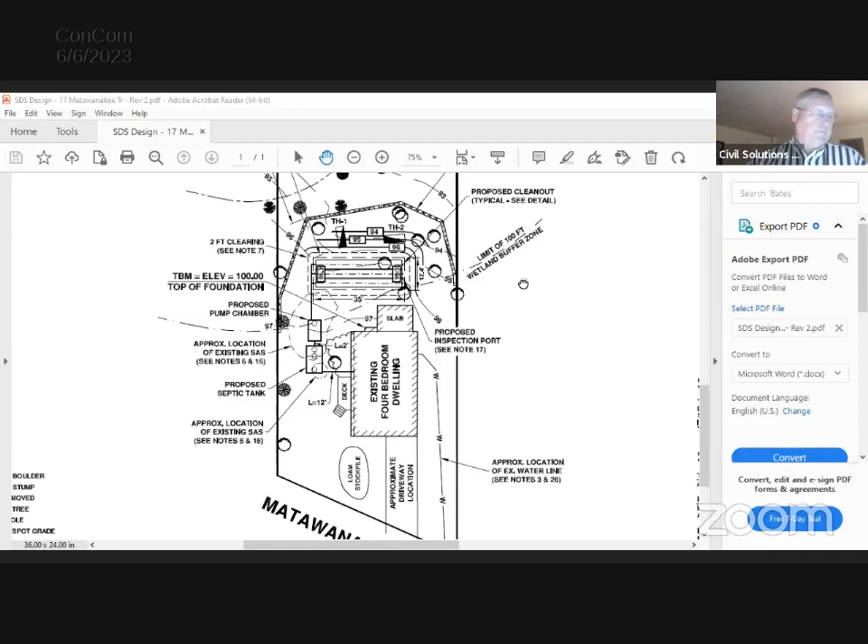The plan, I have made some changes as we discussed at the last hearing. There was some discussion, and I've made the changes. So initially the hay bale line didn't come out quite to the 100-foot buffer zone, so I have extended both ends out to the 100-foot. Did add a stockpile location here outside the 100-foot. Don't believe there's going to be that much fill material here. Most of the material that's out of the area of the proposed leaching area will be used for breakout material right around the base of the system. This should not be excess material.

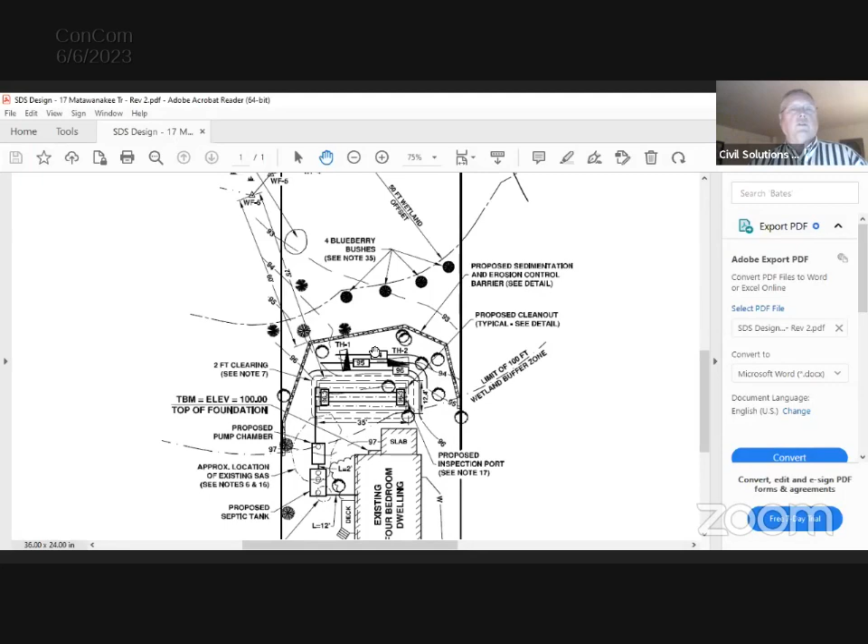But there will have the topsoil, which will have them stockpile out. We had discussed putting a berm along the 50-foot buffer here, basically to try to prevent people from using this area. I think a berm along this area would create more problems than it would solve. I think it would tend to block the water, create a pool in here, which would not help the septic system once you're backing it. So we did have 3 trees that needed to be removed. What I'm proposing is to put some blueberry bushes just inside, or just outside, the 50-foot buffer, basically to create a little hedge row if you want. I think that would be sufficient rather than putting the berm here.

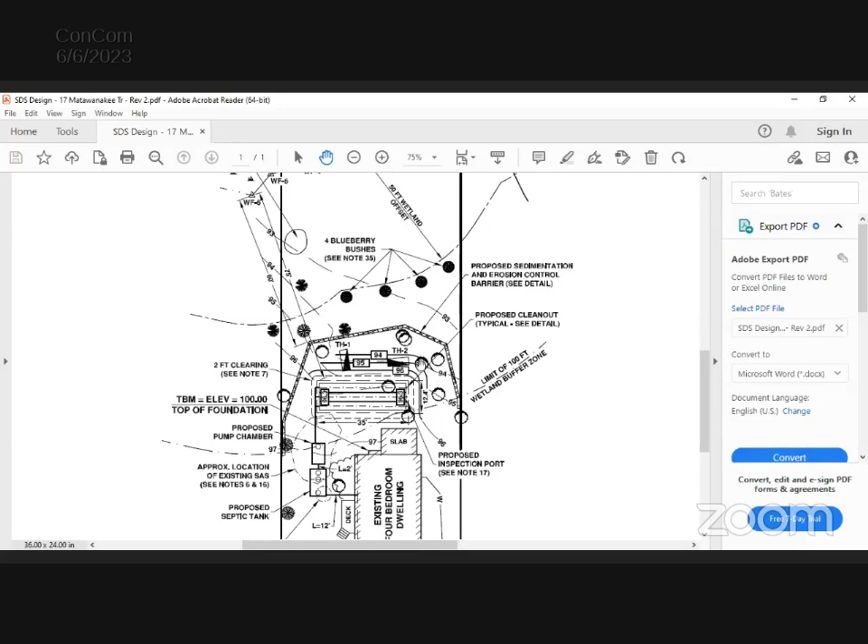So Kevin, you think that 3 trees equals 4 blueberry bushes? Well, I figured 4 is better than 3. What are the trees? I'm not recalling what the trees are that are coming down, Kevin. So there, I think there was a maple. I believe they were all maples. Red maple, yeah, or not even red maple, but Norway. And there were some additional trees back here. It's all kind of rough terrain, I guess, very natural state, which we're proposing just to leave alone, try to maintain it as much as it is.

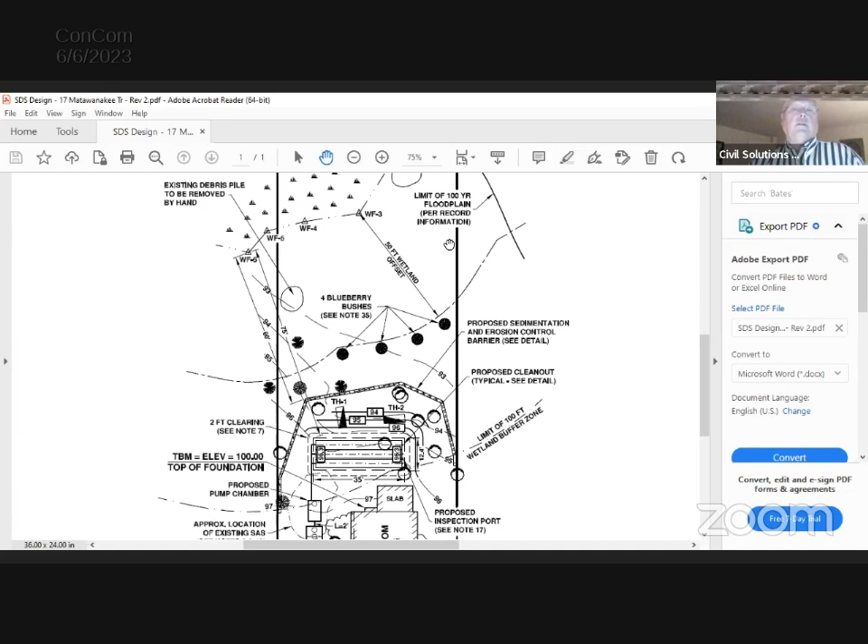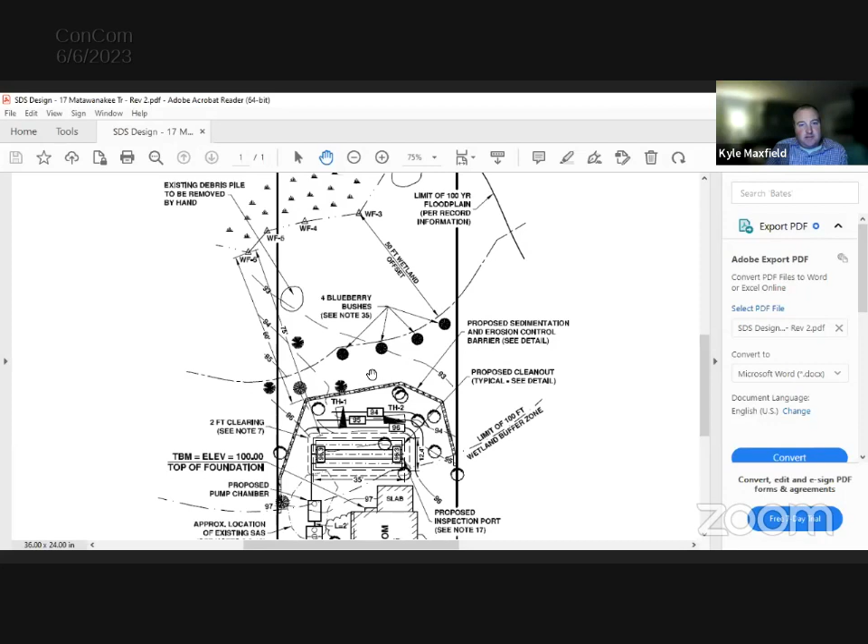Has DEP given you your number yet? I have not received that yet, no. I think I would like to see something a little more robust in terms of plantings if it's not too late, especially since we don't have our number yet. If the commission members are in agreement, I don't want to hold it up. I was going to use the same word, Sarah. I'd like to see more robust plantings, or more diverse. If one blueberry bush dies, they typically all kind of die if they don't like the climate there. So maybe figure if we put something useful that the homeowners would enjoy, they're more likely to maintain them and leave them. Put something else in there, and if they're not so keen on it, then I would say in addition, not supplanting, changing them out, I would try something else in addition. Use your imagination.

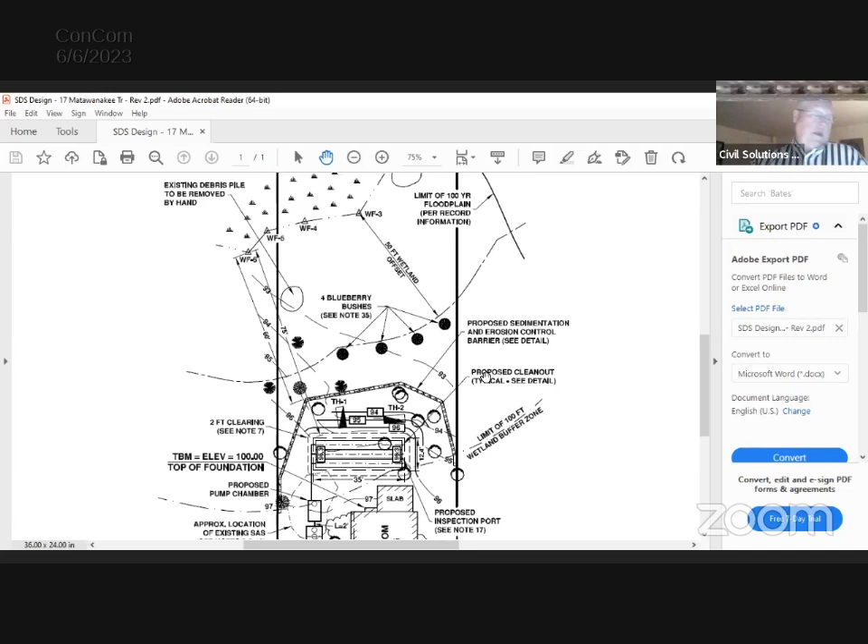Okay, commissioners, any questions? I don't have any questions. No. Okay.

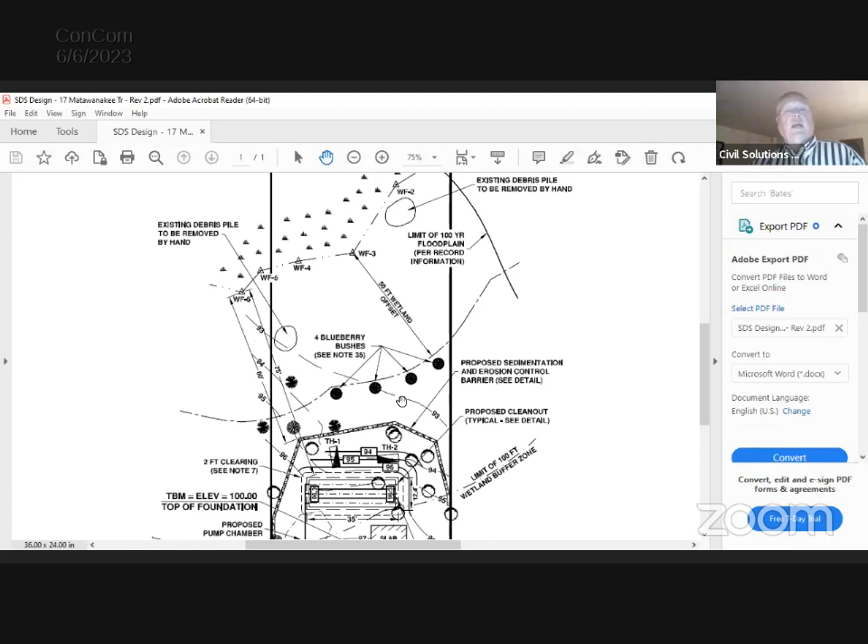Then there were a couple of debris piles, basically some brush that I thought the Commission might want removed. How do you propose to do that? By hand, just walk in there, pick stuff up and all that. Will that be done at the beginning or the end? I would think they'd want to start with that. It's nothing heavy enough, I think it can all be managed by hand.

Can I check with the commission? I would tend to recommend shorter shrubs to go in with the blueberries, because if you put in a shad bush or something, it's going to get tall and they're going to want to cut it down to keep their views. Does that sound, assuming it's robust enough, appropriate? Like the height of boxwoods? Yeah, I mean a blueberry even can get 8 to 10 feet, so just nothing that's going to turn into a tree that blocks their view or off to the side. I don't know if you had a strong feeling one way or the other. If there's anything that could be a pollinator, that would be helpful. Perhaps you and Kevin can work that out. I'll talk to Amy about that then, and between the two of us we'll come up with something.

We meet again on June 20th, where you don't have your DEP number. Are you okay with that? Should have that by then. They'll have had it in time. So are you requesting a continuance till June 20th? Yes, please.

Can you just double check there's no one out there in the audience with any comments? It's weird, because when he's screen sharing I can't see it. I had to shrink my screen so I can see it. There's no hands up, I don't see any hands up. I still can't see it. What can't you see, my screen? No, sorry, the attendees. Oh, I got it. Okay, I got it, Amy. It just makes it harder to see. Yep, no hands. Okay, sorry Kevin, we're just navigating the other way. Yeah, no, that's okay, believe me, I don't have a problem.

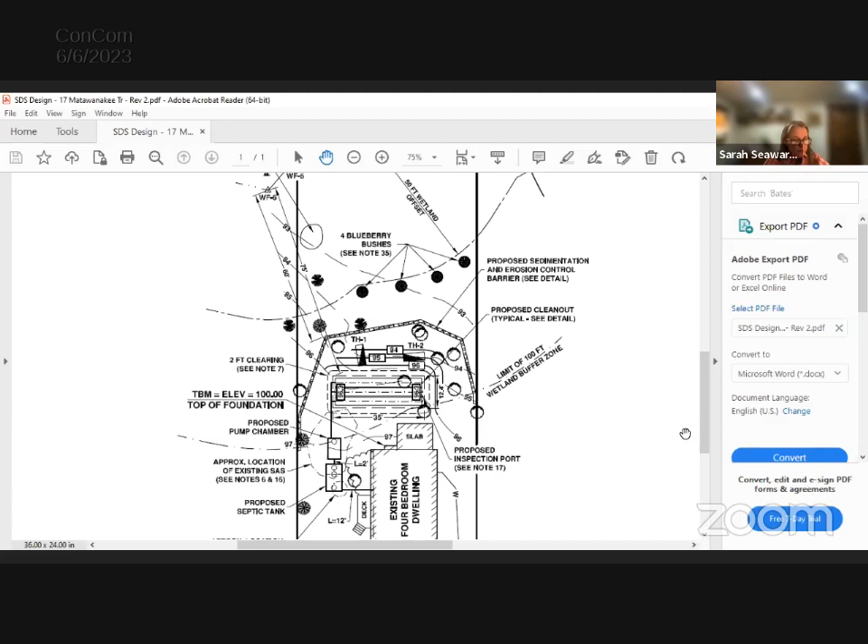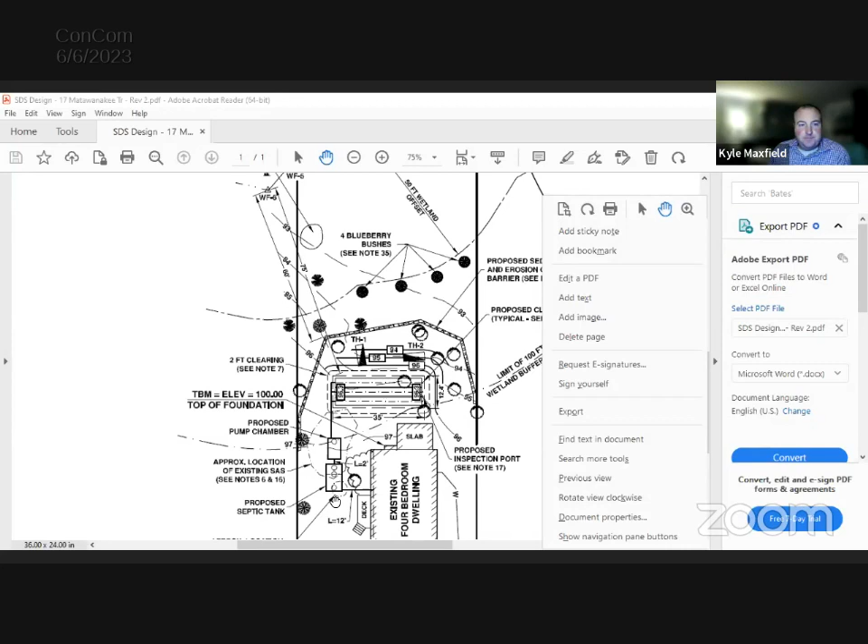Would the commission want any kind of signage in there, or boulders? I don't know if it's really necessarily appropriate, but if there's something, I'm sure Kevin would probably rather hear about it tonight. Have we been using signs lately? No, Durkee. Yeah, what are they? We did do it over at Durkee. I mean, I guess this is just one individual lot, there's a house right next door and another one right here. These lawns go way back. Yeah, and this lawn here basically goes back to the wetlands. Okay, I'm not sure I need to see signs here. I agree. Okay, I think you're all set, Kevin. Thank you, all right, thank you.

Okay, the time is now 8:38, and we're opening the 8:15 public hearing, request for determination of applicability, Foster Street reconstruction. Who is here to speak to that?

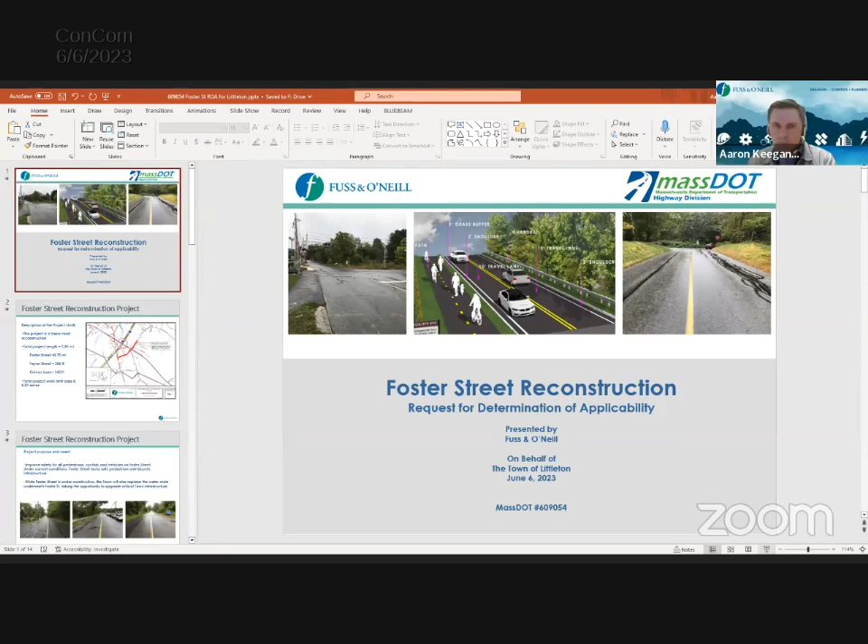Okay, so our request for determination of applicability is for the Foster Street reconstruction project. We are MassDOT project number 609054. It is a transportation improvement project. Construction is being funded by MassDOT. The applicant is the town of Littleton and Stephen Yonley from the Department of Public Works.

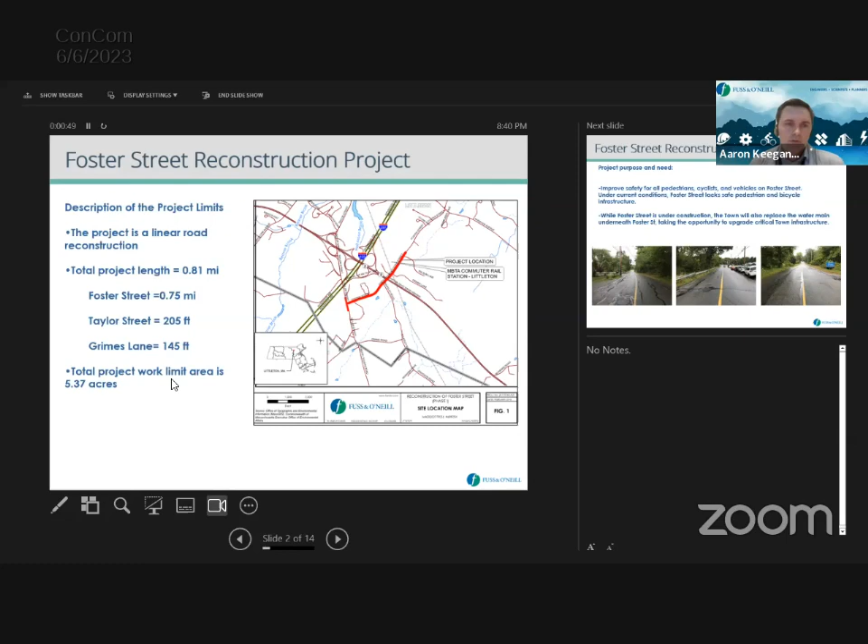The project limits extend from Taylor Street to Balsam Lane on Foster Street. Total project length is 0.81 miles, mostly on Foster Street, with some length on Taylor Street, about 200 feet, and about 150 feet on Grimes Lane. The total project work area limit is 5.37 acres.

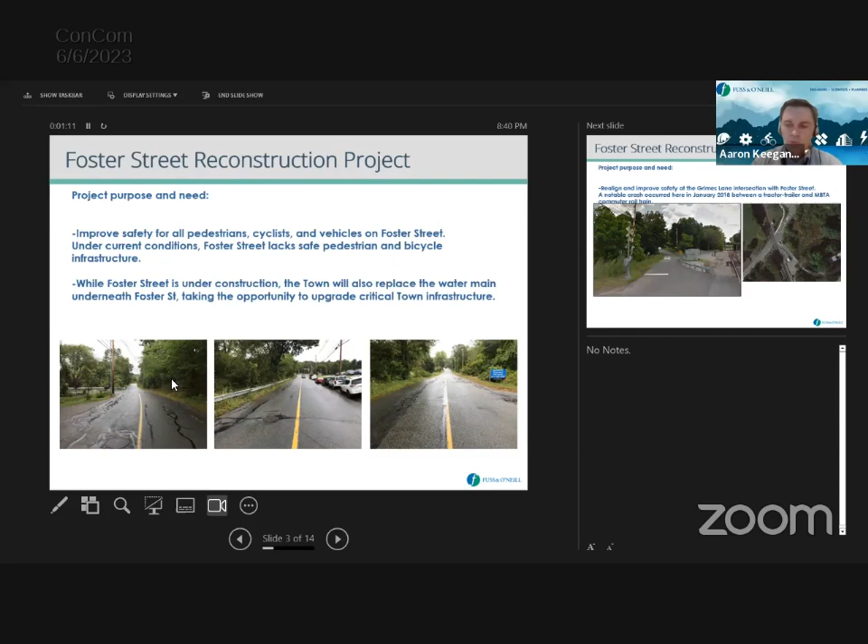The purpose and need of the project is to improve safety for all pedestrians and cyclists. Currently, there are no sidewalks or bike lanes on Foster Street. A major element of the project is underneath Foster Street. The town is taking the opportunity to replace the water main while the road is under reconstruction, under what we call a dig once strategy.

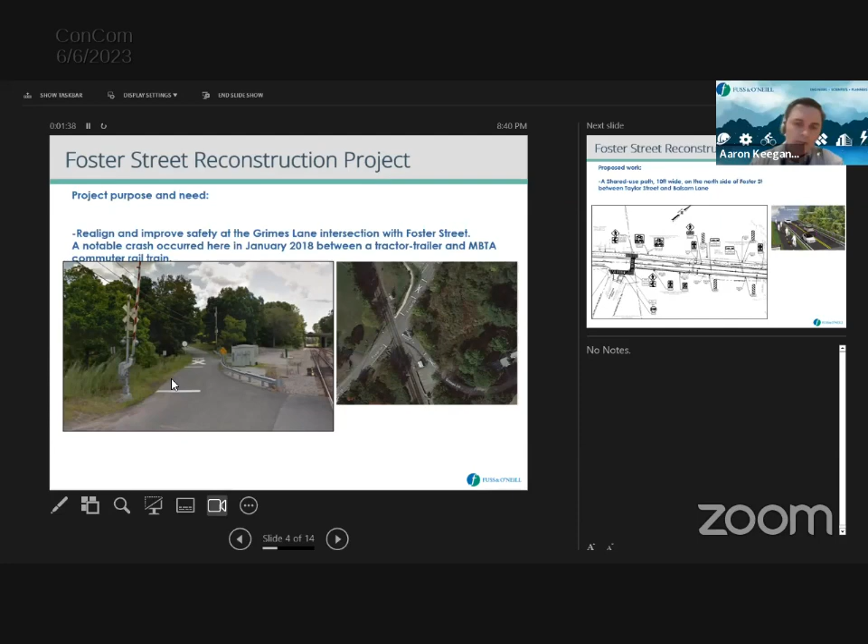Another major purpose of the project: Grimes Lane, where it intersects Foster Street, currently does not meet standards for the alignment of the road where it meets Foster Street near the MBTA rail crossing. Also, the road is substandard width for a two-way street. So the purpose and need is to correct some of those design deficiencies.

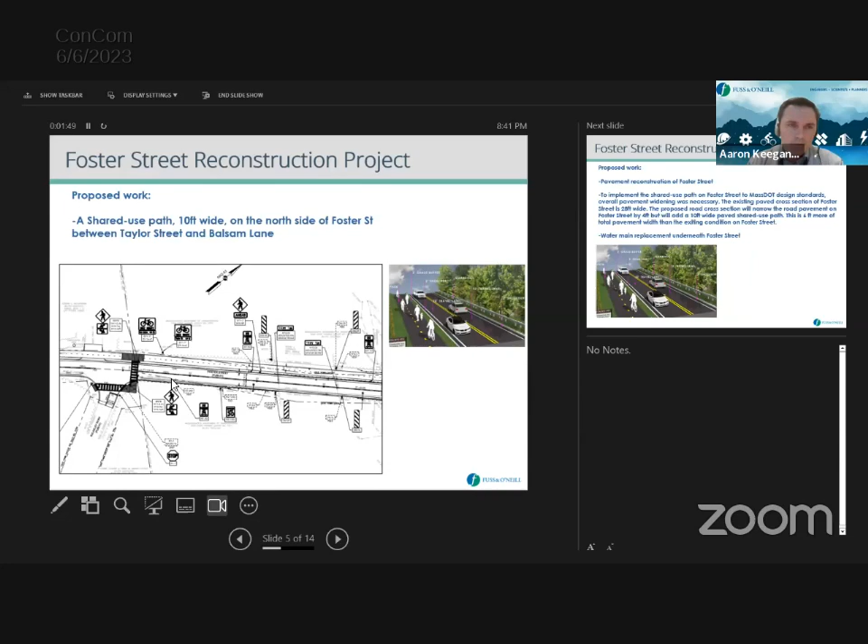Proposed work: the project proposes a 10-foot shared use path on the north side of Foster Street between Taylor and Balsam Lane. The cross-section of Foster Street, as it is today, is 28 feet wide. The project will narrow Foster Street itself by 4 feet, but then add a 10-foot wide shared use path parallel and adjacent to Foster Street. The net widening of Foster Street is 6 feet of pavement.

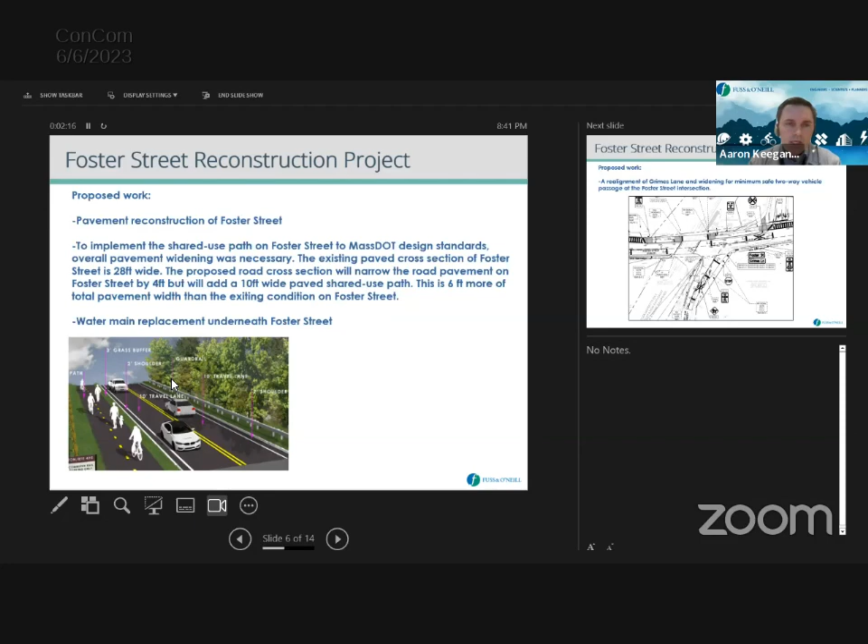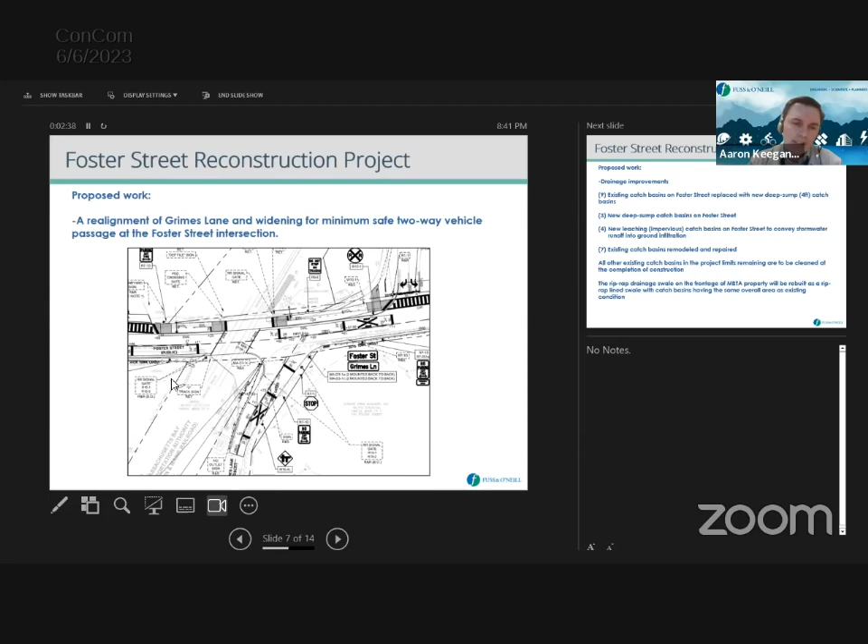Also, Grimes Lane will be shifted away from the railroad tracks, widened to the minimum allowable 2-way traffic width. Another reason for the realignment is to make sure that when a vehicle is stopped at Grimes Lane, it's outside of the envelope of the safety crossing gates for the railroad tracks.

Along with the project, we'll be improving drainage. We will be replacing existing catch basins with deep sump catch basins. We're proposing 3 completely new catch basins. There are 4 leaching impervious catch basins that we're proposing. There are 7 existing catch basins that will be remodeled and repaired. All other catch basins that remain as is will be cleaned as is customary practice during the project. The riprap swale at the frontage of the MBTA property will be shifted by about 10 feet behind the proposed shared use path and put back to its current dimensions.

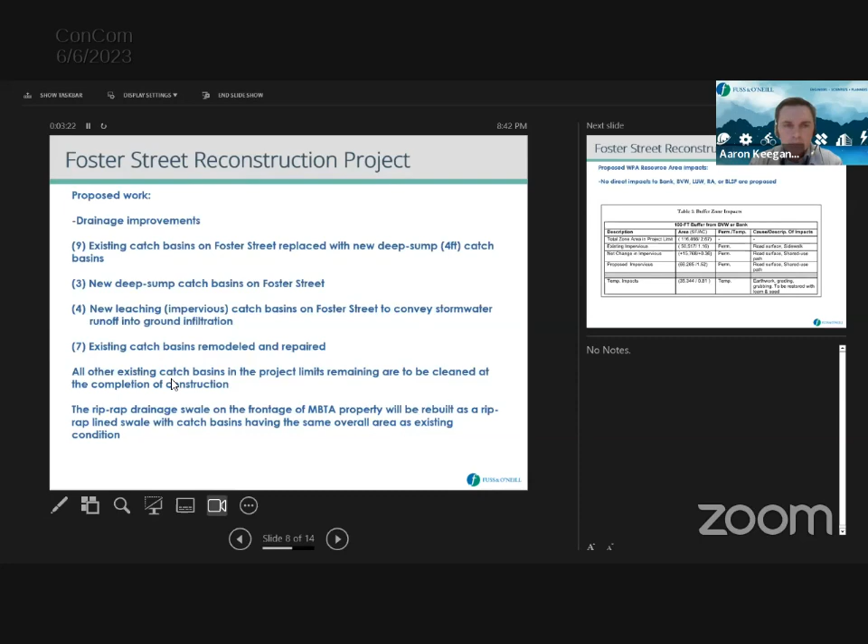Our proposed impacts: we are not proposing any direct impacts to WPA resource areas such as bank, BVW, land underwater, riverfront area, or BLSF. We are proposing buffer zone impacts. Our proposed net change in impervious area in the 100-foot buffer zone is about 0.36 acres, and our temporary impacts to the 100-foot buffer zone for work areas, mostly grading back to existing ground, is 0.81 acres.

As we mentioned in the RDA document, we just want to point out that the project is eligible as a limited project and also a redevelopment project for stormwater management.

Moving on to impacts under the Town of Littleton wetland protection regulations, the project does propose impacts inside the 50-foot no disturb zone. The net change in impervious area in the 50-foot no disturb zone within the project limit totals 0.17 acres, and proposed temporary impacts during construction for earthwork, grading, tree trimming, are to be replaced with loam and seed. The total area inside the 50-foot no disturb is 0.33 acres.

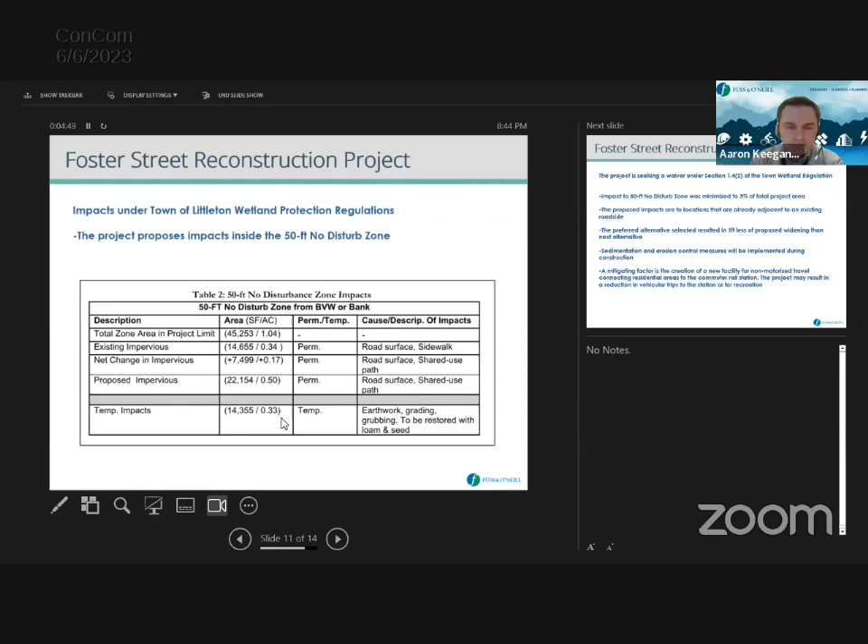The project is seeking a waiver under the town wetland regulation. The mitigating factors are that the project will propose a non-motorized facility that could reduce vehicle trips to the commuter rail station from the adjacent residential areas, and therefore may have a positive impact on emissions. The project, as a MassDOT project, will be under construction under the inspection authority of a MassDOT resident engineer who will be on site daily, and will include sedimentation and erosion control measures put in place and kept in place during construction.

We did also want to mention that the 10-foot path alternative was selected over the next alternative, which would have been to add 2 5-foot bike lanes to the road cross section. The preferred alternative with the shared use path is a foot less widening net, and also includes a grass buffer strip between the shared use path and Foster Street to help a little bit with infiltration. So that's a little bit about the alternatives analysis.

And just lastly, the impacted resource areas, the 100-foot buffer under WPA and the 50-foot no disturb zone, are areas that are already adjacent to Foster Street. Just wanted to mention that we're not proposing to impact a pristine resource area. It is, of course, a resource area, but one that's already adjacent to a roadway. And with that, thank you for listening, and we will accept questions and comments.

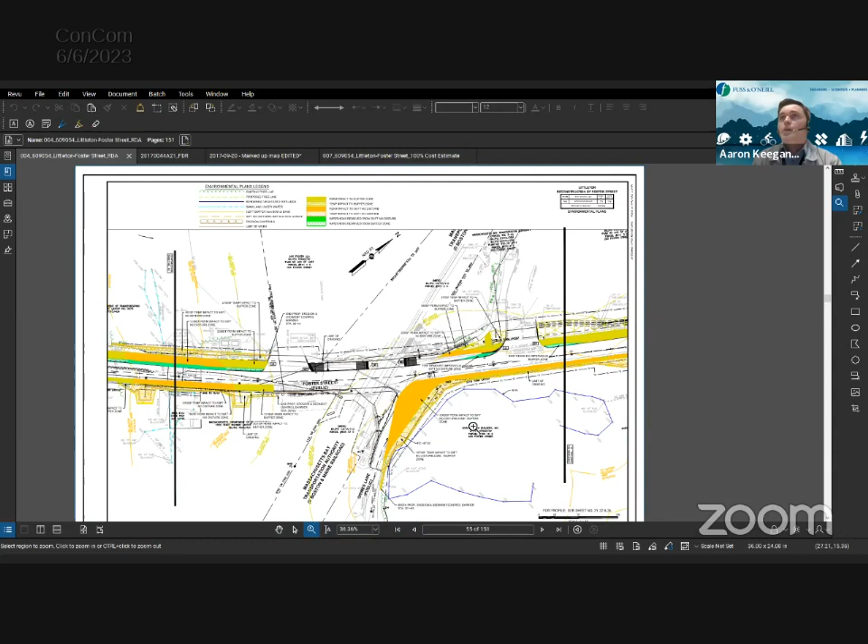Here's the area in front of Grimes Lane, where my cursor is. We can see that the shifting of Grimes Lane out of the railroad tracks does unfortunately cause an impact to the 50-foot no disturb area. The MBTA station is at the top of the page to my right, and on the next page, you can see it continues in front of the MBTA station.

So the dark orange solid shade is the proposed permanent impact to the 50-foot no disturb area, and you can see the Grimes Lane relocation is probably the largest contributing factor.

The upgradient source of that wetlands is Durkee? Yes, water flow. What season are we looking to do this construction?

I'll have to double check. Nick, do you recall - I think because we have had over the years some significant water that has come down through there out of the adjacent property known as Durkee, I would look more favorably on doing this during a drier season.

Yeah, so MassDOT, the means and methods in the overall construction schedule will be developed with the final bid documents and with the contractor. But this project is scheduled for advertisement, I believe February of 2024, so construction would likely not commence until the summer of '24.

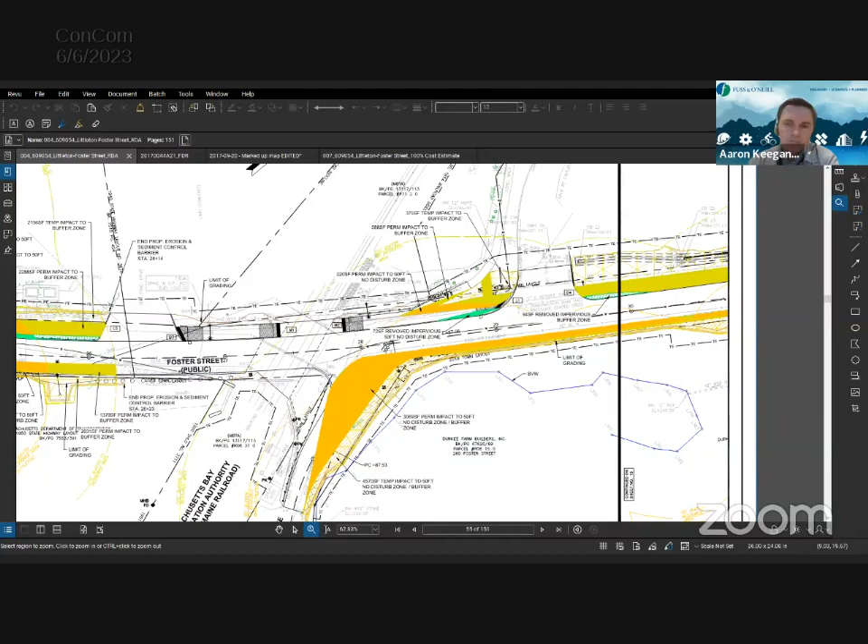Yeah, that was the question I had too, Chase. I mean, and I appreciate the 100-foot comment, but you went on to inform us that there's permanent impacts within the 50-foot no disturb area. I guess we could look back at that, but I'm not sure that we've given a negative determination when you're having permanent impacts inside of the 50.

Well, I mean, I guess the entire road is within the no disturb area, so it's like you can't even do any road work. It's kind of the linear road projects, that's kind of why - I don't know, Aaron, if you want to touch on the limited status. It's almost not even - how can the town do anything on a linear project?

The area impacted is significant, however. Was the water line replacement that they did a little while back an RDA? I guess I'm asking Amy. Can't speak to that. I'm not sure, I can't. I'm thinking it was notice of intent, but I'm not 100% sure, I do not remember. And that was pretty much 100% cut and cover on the road? No, they had some shoulder work, I think.

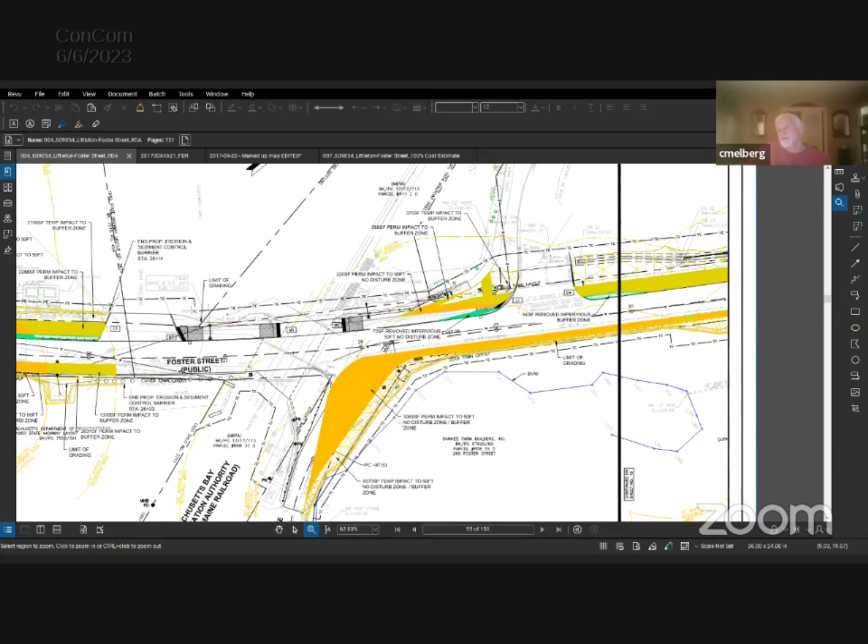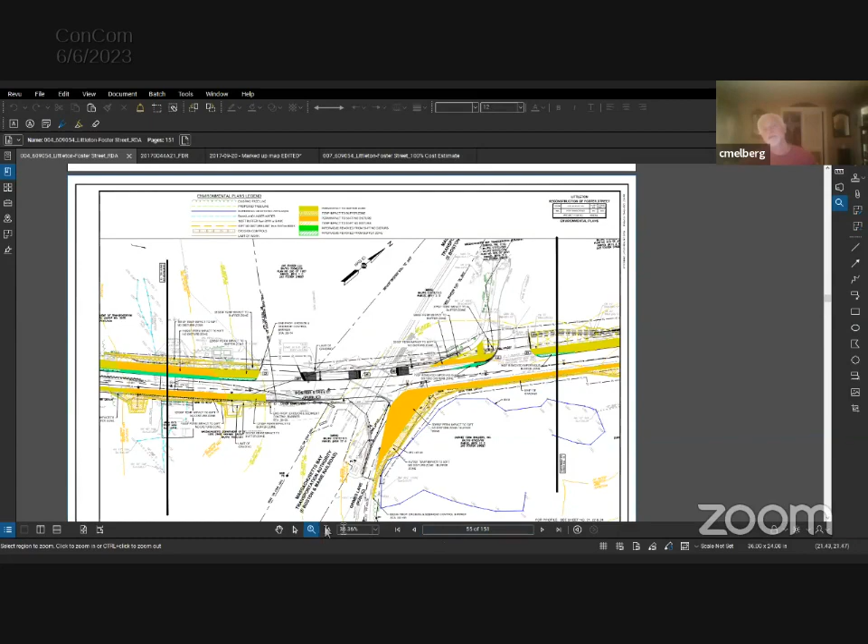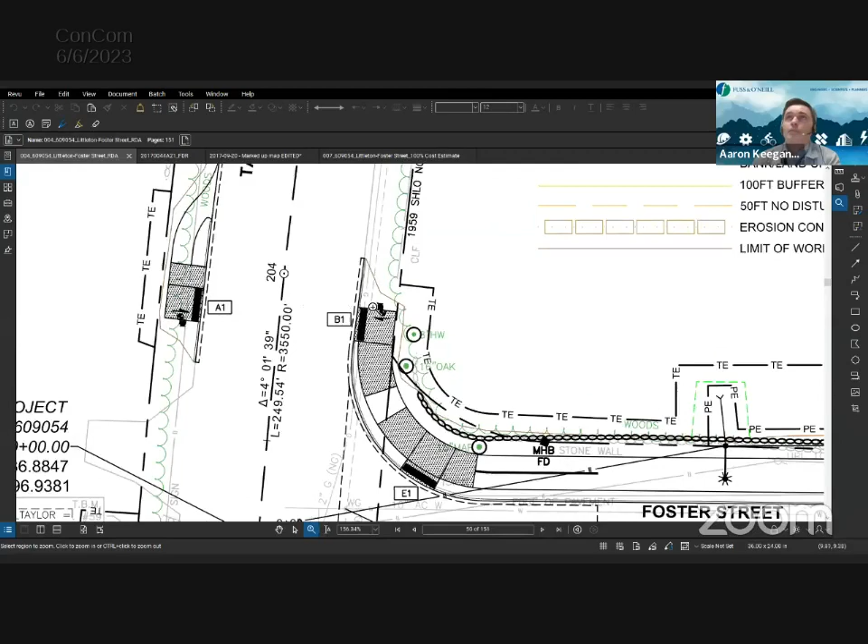Okay, anyone have any questions? Hey Sarah, Carl, so the project goes to Taylor Street, correct? So Taylor and Foster, yes. Does it happen to meet any type of sidewalk up there, or bike lane, or are we just making this new multi-use lane that's going to dead end? There's a sidewalk on both sides as you go out to Taylor, on the left and right, isn't there? Yes, we're proposing two pedestrian ramps with an on-ramp for a bike shoulder on Taylor Street, and there'll be a flashing pedestrian beacon for this crossing on Taylor Street.

Oh, that might be. Currently on Taylor Street there's nothing, no sidewalks, absolutely nothing. Now, I will say it's not subject to this project, but the town, I'm sure you're aware, is looking to install a sidewalk from the new Amazon facility down Taylor Street to connect up with this project. So there is a larger picture at stake here. So this is kind of an enabling project. Yeah, I get it, that was just my point - we're kind of just building this and it's going to stop. No, I think the plan is to connect up to all the businesses on Taylor Street and continue the sidewalk for connectivity purposes.

Yeah, no, it's a good question. I think the town's looking - this is phase 1, Foster Street. We're working on phase 2 and 3, which takes it all the way up to Tahattawan and Harwood. There's bigger plans. The bigger concern isn't going to the Amazon building, honestly it's going the other way down - getting the rest of the neighborhoods into it. The same point goes the other way - it's just going to dead end to nothing at this point, right? There's no sidewalk down Foster Street, so you're going to stop at some point.

Hopefully in the second phase. Yeah, we tried to get it to Balsam - that was a big generator in the neighborhood. When we were working a couple years ago with the former director, we found this is the first phase - we wanted a quick win to build momentum, because the next phases are not easy. The road gets really tight, there's big trees, really steep slopes. The roads are really tough. So stay tuned, but yeah, this is phase 1 of 3 basically.

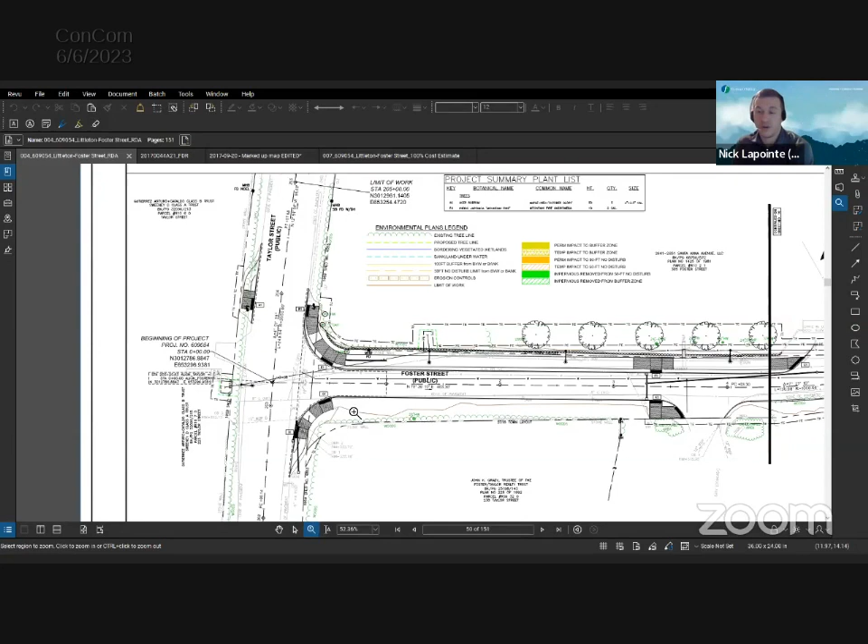We could probably still have a site walk without necessarily having... I think, Amy, what we could do is put it on as a discussion for the 20th and see if on the 20th we have to do any other site walks, and maybe kind of combine them together if we can. Yep, okay, all right. Thank you, we appreciate your presentation, and we'll wait for the notice of intent. Okay, thank you. Thank you.

It is now 9:06, and we're going to open the 8:30, which is a continued public hearing, notice of intent, 166 Mill Road, which is Mass DEP 204-0981. I'm letting them in now.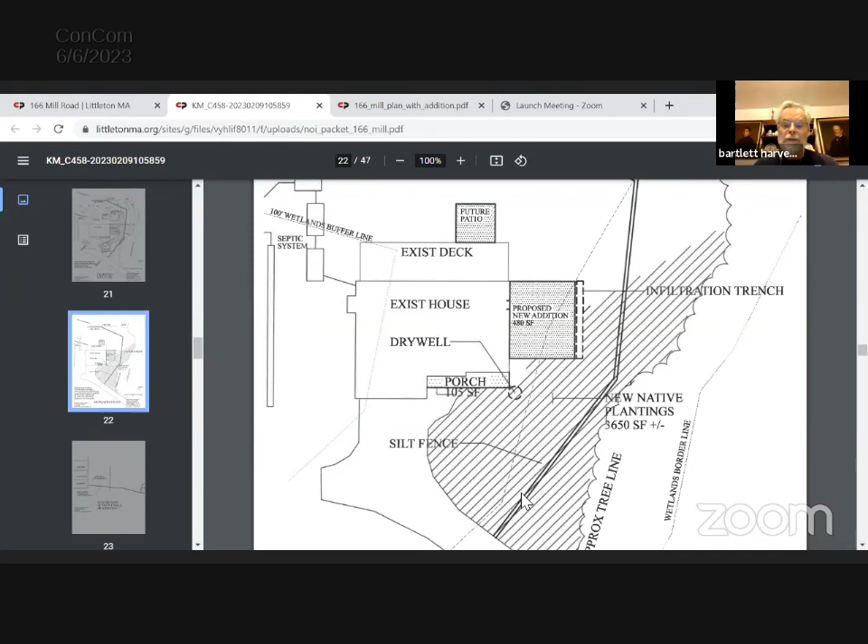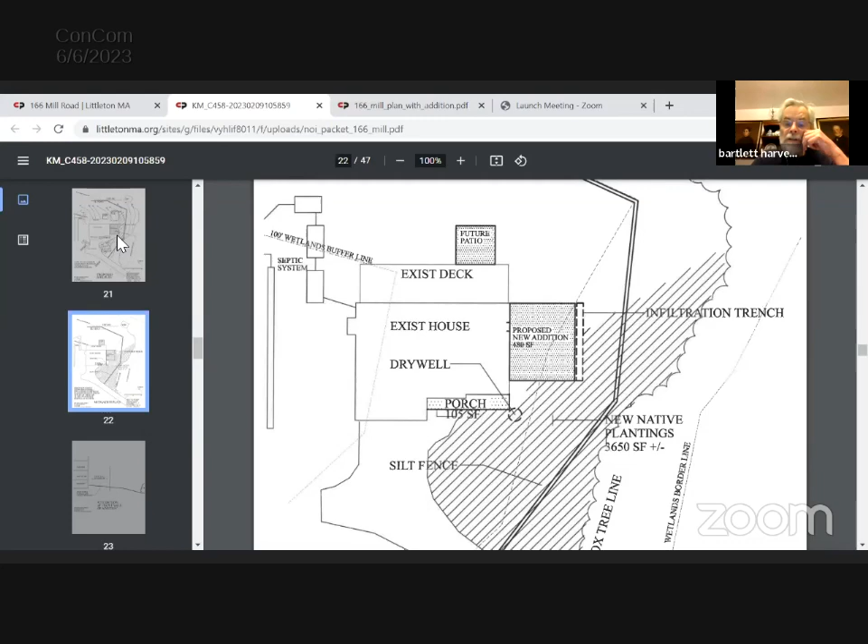There's a storage area between the driveway and the silt fence for stockpiling materials, shown on one of the drawings. But I think you get the idea of where this location is. This side of the house gets the sunlight the client wants. The back of the house doesn't get any sun at all, really, so moving the house back there doesn't make any sense. And the whole site around the house is fill.

We also propose an extensive program of eradicating invasive species on the site. There's a lot - we saw garlic mustard earlier. I know there's a lot of Japanese knotweed and bittersweet vine that we've been trying to get rid of, and we want to continue doing that. So we really have the same proposal we had in February.

We just want to bring it back to the commission and get a reading on whether we can do this. Mr. Harvey, thank you for your detailed presentation with this map, this is helpful. Can you tell the commission, your proposed vehicle access, how close within the 50 is your silt fence and your access area?

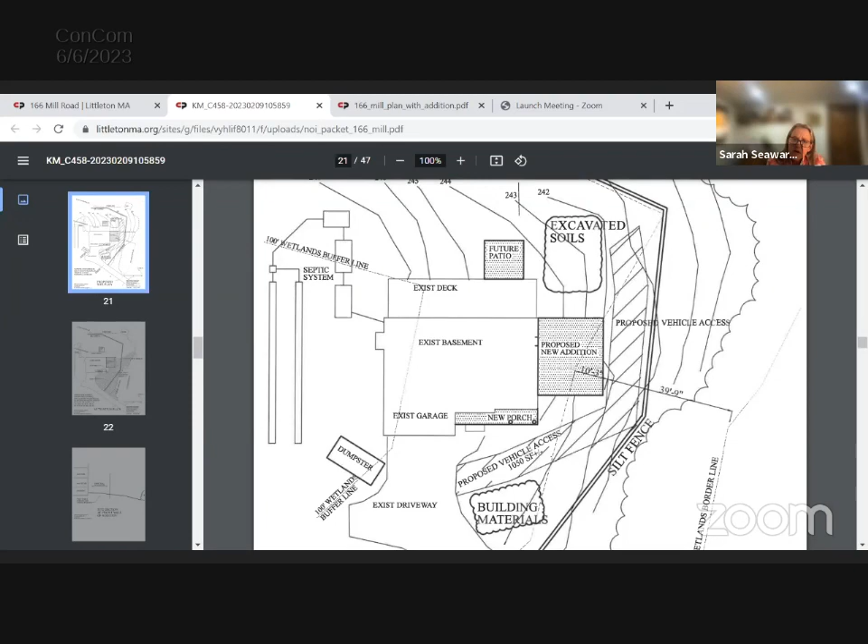Well, let's see, I don't know. The silt fence is the double line that's pretty close to the tree line. The 50-foot line goes through the addition, it's that thin dotted line. So the vehicle access to the back would also be in the 50-foot line. So it might be easier to work backwards - if we were standing on the wetlands flag line, how close is the work to that line? Well, I've got 39 feet there, which is the nearest corner of the addition to the wetlands, to the flagged line.

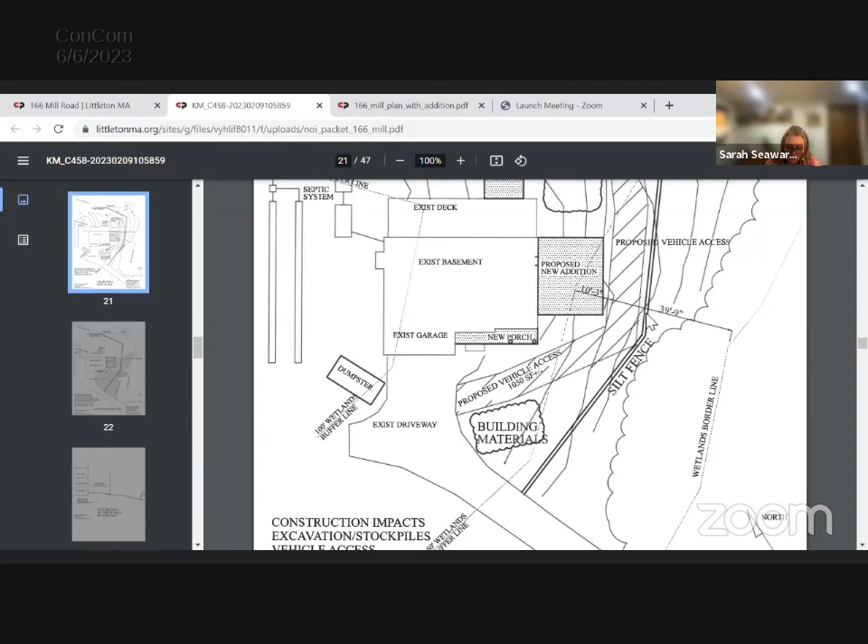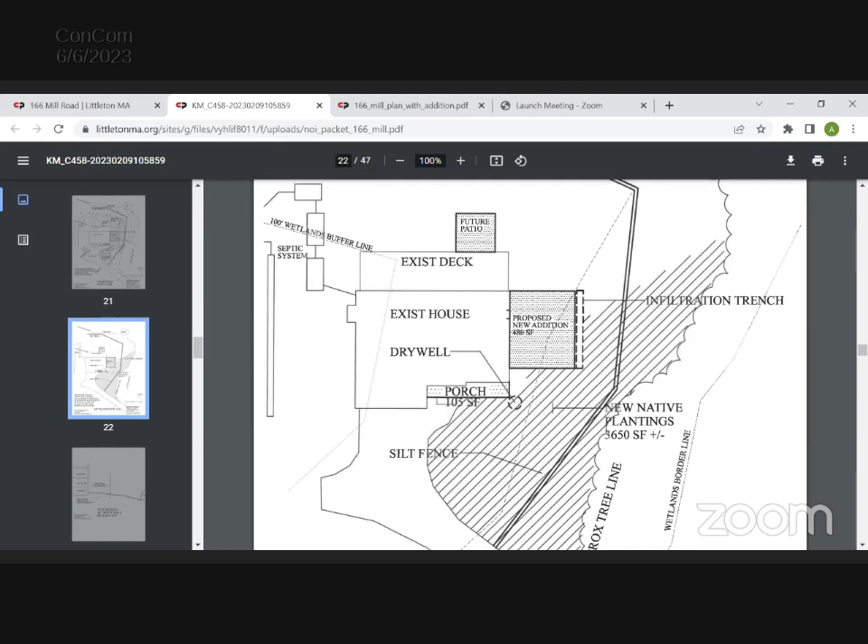Okay, thank you. Commissioners, questions? I know some have been out on site. Yeah, Amy, can you go back maybe down a plan there? My question is about the new native plantings. Now I'm seeing a fully hatched area here - am I to understand this is going back to a naturalized meadow or something like that, or are you talking about putting individual shrubs and trees in this area?

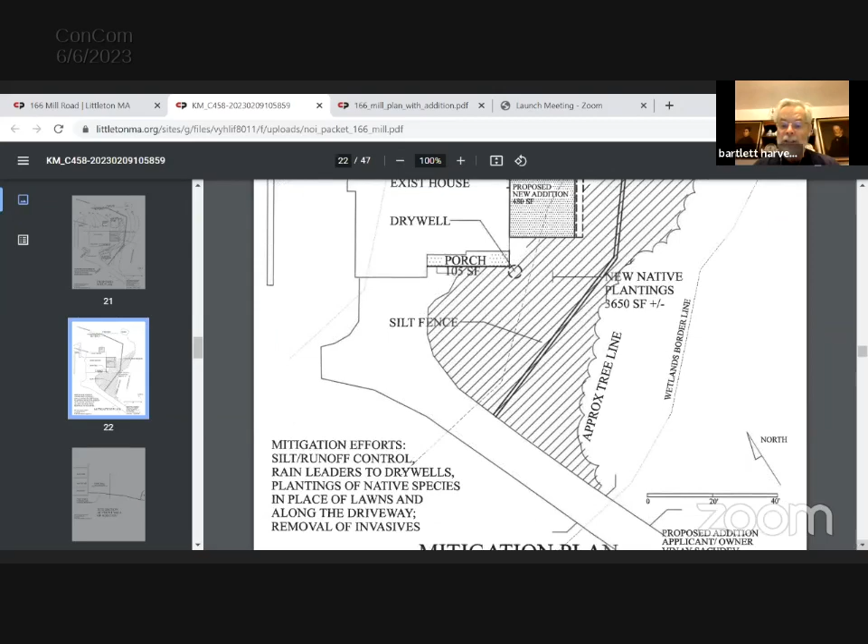Well, we haven't identified it, but all along I've been thinking shrubs and trees. There's lawn there now that's not very successful. We'd have to find plants that work in the available sunlight. But my goal, and I believe my client's goal, is to reduce the amount of lawn and lawn mowing, so that we'd have plantings between the house and the tree line, and also there's an area of grass along the driveway going up to the road that has plantings in it now, which we'd expand, native plantings along both sides of the driveway going up to the road, which would be part of the removal of invasives.

So is that part of your narrative for your waiver? Yes. Okay.

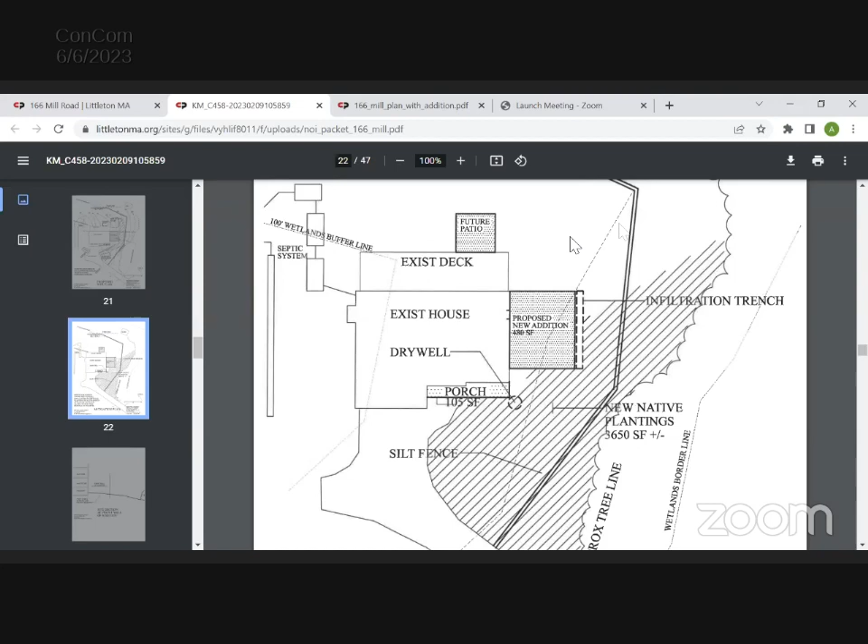How does this reconcile with the May 19th plans on the project website that show a wetland replication area? I'm rather confused here. Well, the wetland replication area was what was left over, undocumented from the 2007 order of conditions when the lot was proposed and the bridge was built across the stream.

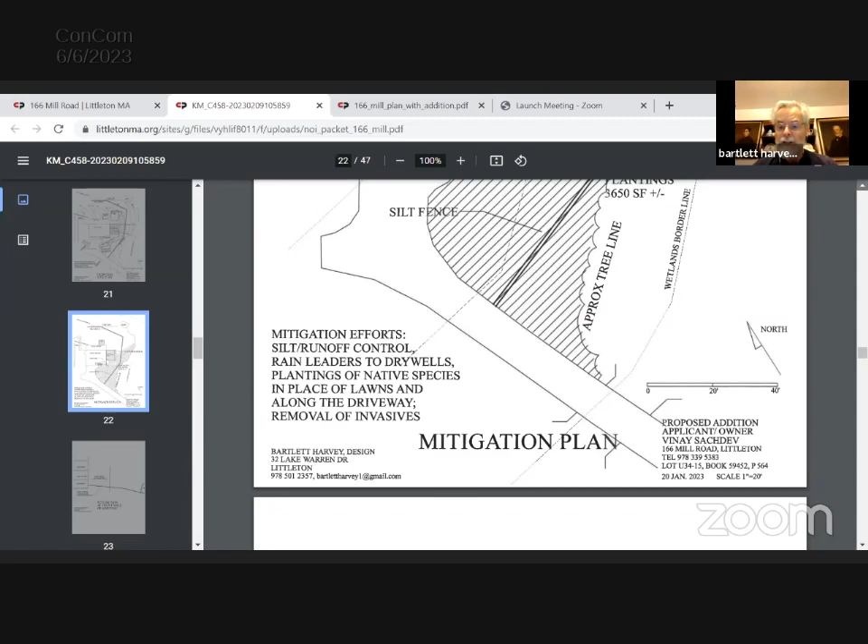That wetland replication was done and completed. I don't know exactly when, but it was visited by Maureen Harold and later by Matt Waterman. Maureen identified wetland species and wetland soils in the area indicated on the map.

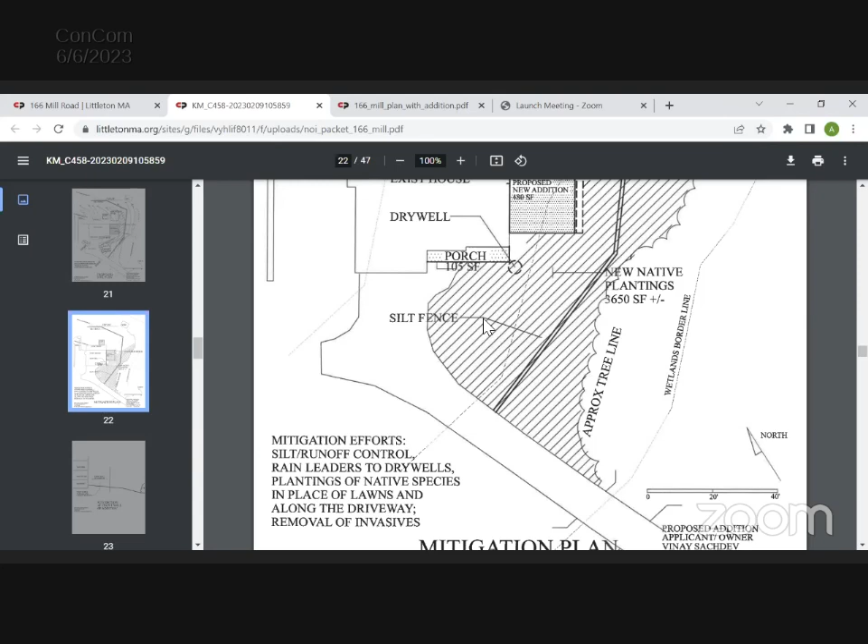So that's to do with the closure of the old order of conditions. Yes, okay, I got it. I'm sorry, I misunderstood, I thought it was a change associated with this project. No, very good. Thank you.

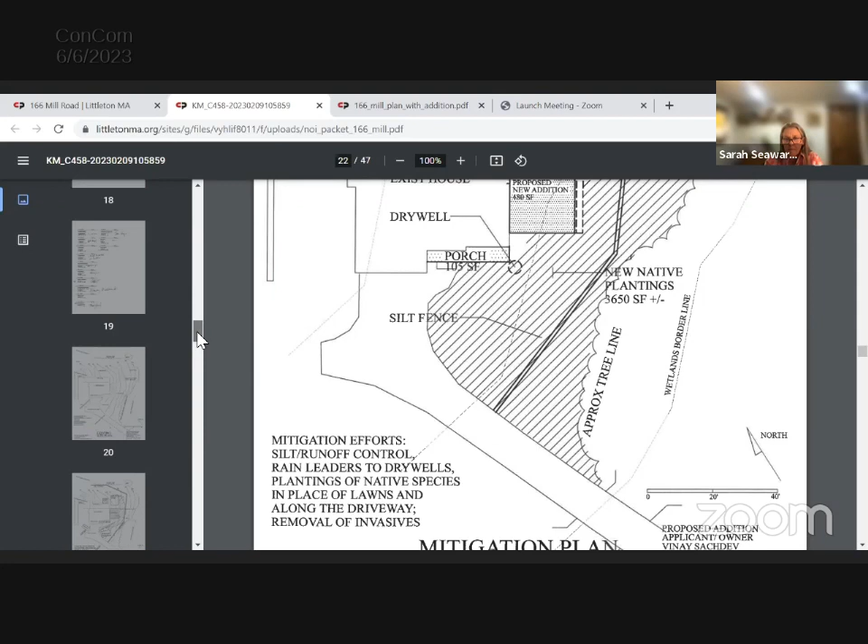Is the proposed addition going to be on piers, or is it a full basement? No, it's a full basement the way it's designed right now.

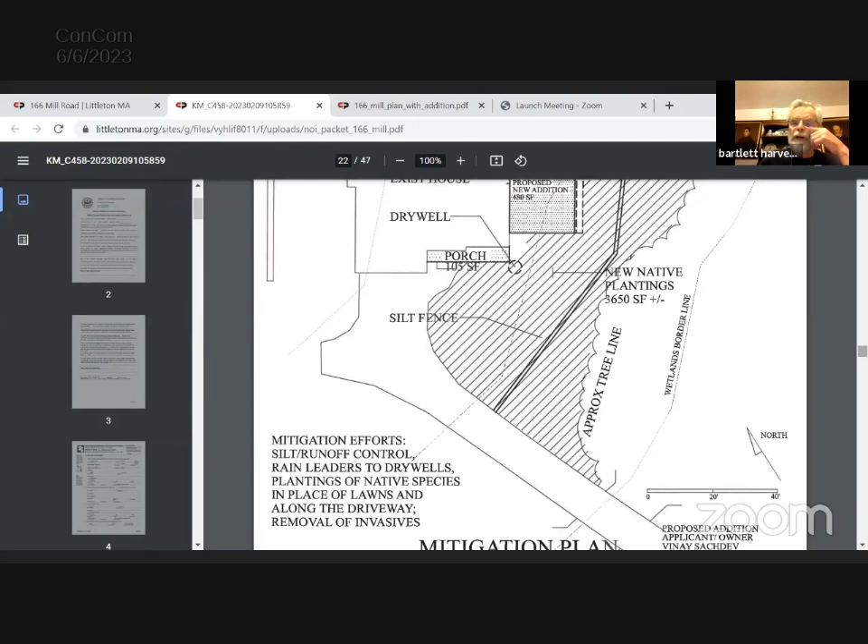And the white space next to it is a gravel trench for disposal of rainwater, with leaders coming off the roof. I think that's why we had some concerns on the first go round, that it was on that slab.

Questions? Guidance for the applicant? I just question if it meets the waiver requirements. I continue to fail to see how it does. Yeah, that's the main question we had on this same plan a few months ago, right? Quite some time ago, yep.

What's the pleasure, there's a notice of intent in front of us. We've done a site walk, quite a few people have been out.

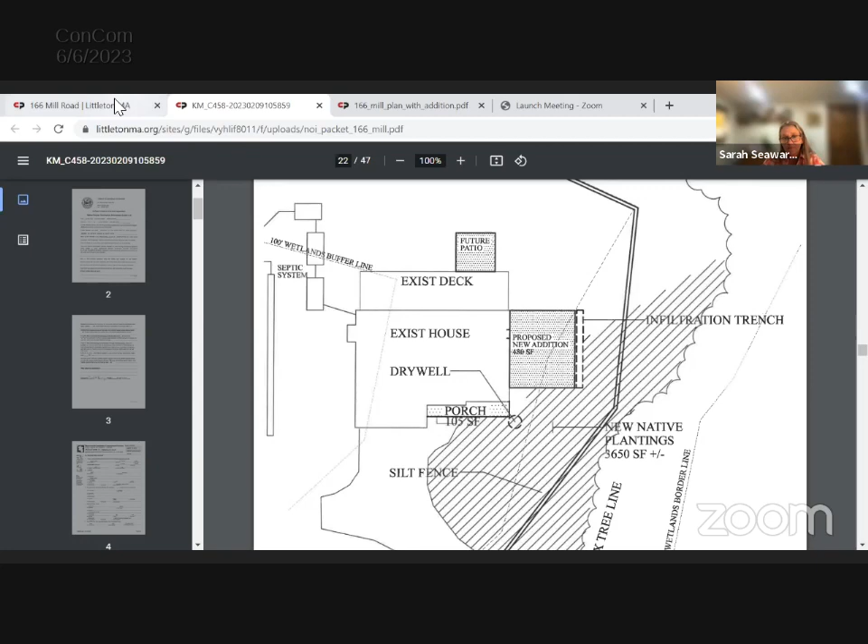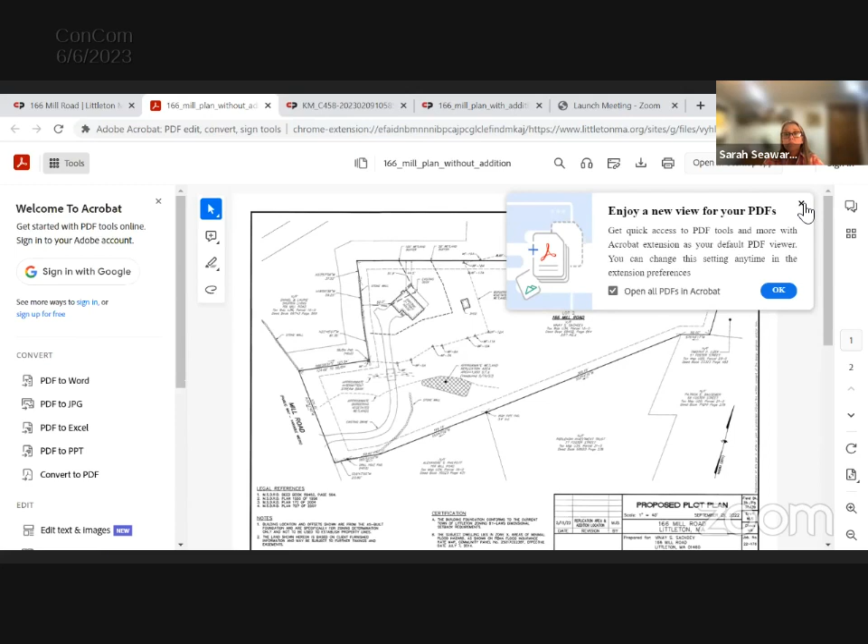Commissioners? I have sufficient information to vote. Okay. Likewise.

So with that, Bartlett, I think you're hearing that it's similar to the same feedback we've had before with the waiver, especially when asked for alternative analysis. There is land available that does not impact that area. Well, there's land in back of the house that doesn't get sunlight and doesn't meet the client's requirements. It's outside of the 50-foot, but it's within the 100-foot. Right, and it's most of the house. We recognize that. Commissioners, what would you like to do?

We still have a couple more hearings to go. Well, it doesn't appear as though the applicant is going to change. He's sticking with the plans currently proposed. So if there's no other changes, we could put it to a vote.

Okay, we would need a motion to vote. Then I move to close the public hearing and issue— well, let me just take one. I'll move to close the public hearing associated with 166 Mill Road, Mass DEP file number 2040981. Do we have a second? Okay, motion to close the hearing has been made and seconded.

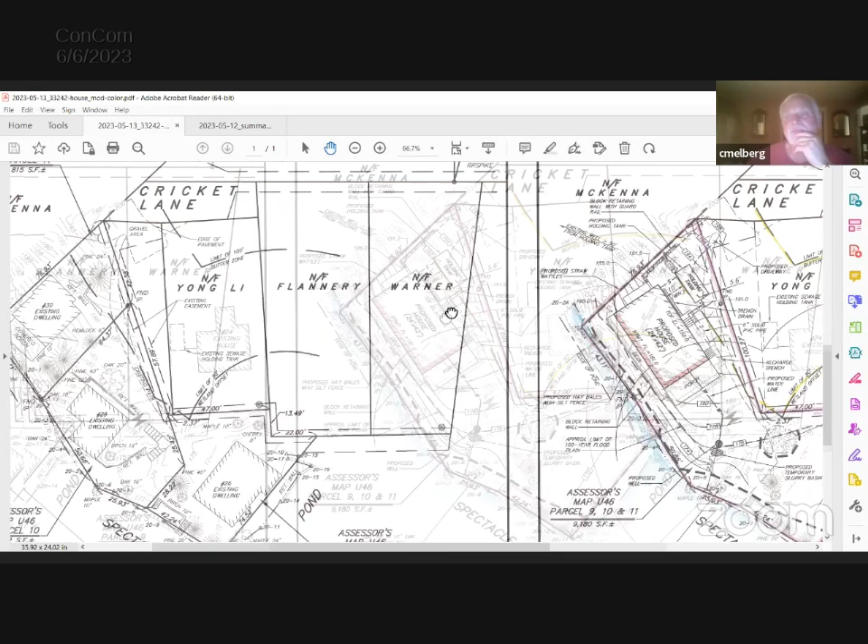So guys, let's get something straight. This was an existing... This is replacing an existing house. There was actually footprint there. There were actually 3 houses here.

Part of the initial approval to go in was, as opposed to upgrading and improving all 3 structures, what the applicant wanted to do was basically eliminate the 3 and build 1 in this area.

So that's why. Where were the septic systems for 26, 28, and 30? In terms of Board of Health records, there really wasn't anything on them. I believe one had like a leaching pit, but there was no real septic system that would come anywhere close to passing Title V.

Were they considered seasonal or year-round homes? I don't know if there was an official designation on them, I'd probably have to check with the assessor, but just looking at the construction, I'd say they were probably more seasonal type buildings.

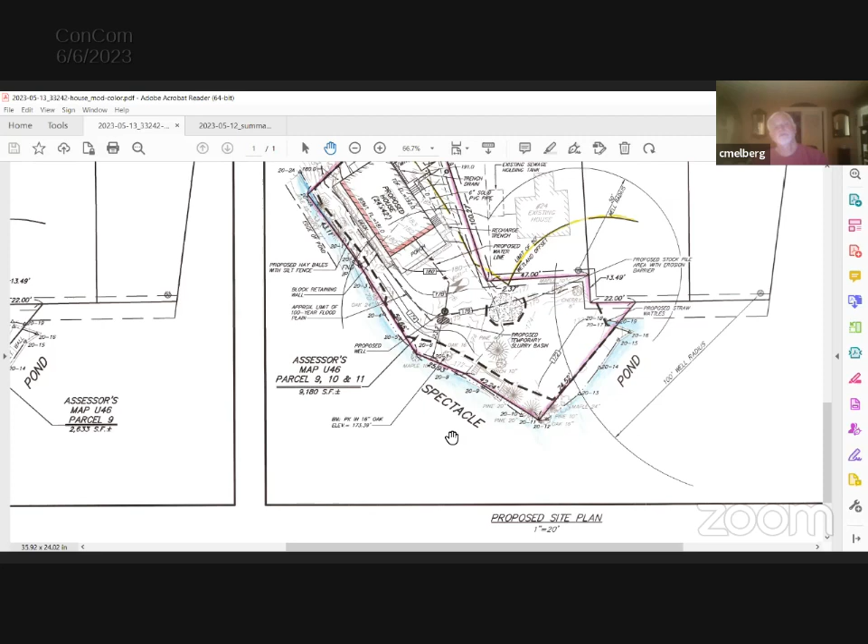So that's why, when you look at the two and what we went through before, what we've done is eliminated all the structures in this area here. So the proposed house is a new footprint. Correct, where a house wasn't before.

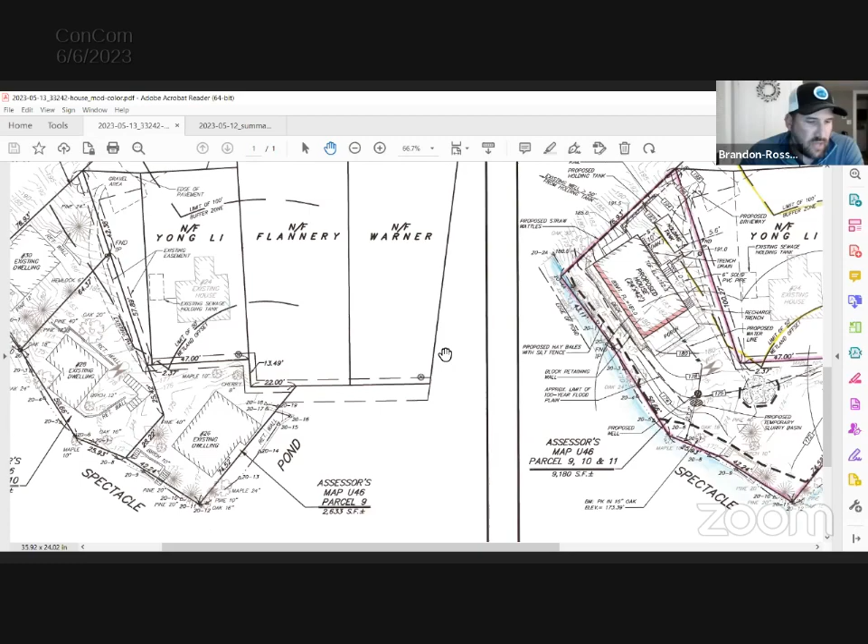And the closest point to the lake is what? Pre-existing it was a little less than 2 feet. The proposed foundation is just under 14 feet, and as you look at the aerial deck, that would be 9.4 feet horizontally.

I get the whole thing. It puts us in a very difficult position. I don't feel comfortable with this. I don't know.

Can we talk about the location of that proposed slurry basin, the temporary basin? Why was it put so close to the lake?

Given where the proposed well needed to be, that slurry basin needs to be just down gradient. During the drilling process, it's there to capture any product that comes out of the well. Given that this site is so tight with limited access, one thing discussed at the original notice of intent hearing is we can't get a drill rig down there, so it's actually going to be a point well. So besides testing the well, it's not going to have as much of that slurry as you'd get with a drilled well, but we still needed to provide something, just in case.

Commissioners, I can see that Carl has some angst about this. What are some of the other thoughts of other commissioners? I'm aligned with Carl here. In terms of the size of the building, the location, let's try and give some guidance on the change. I'm opposed to the change. Okay, thank you. Other commissioners?

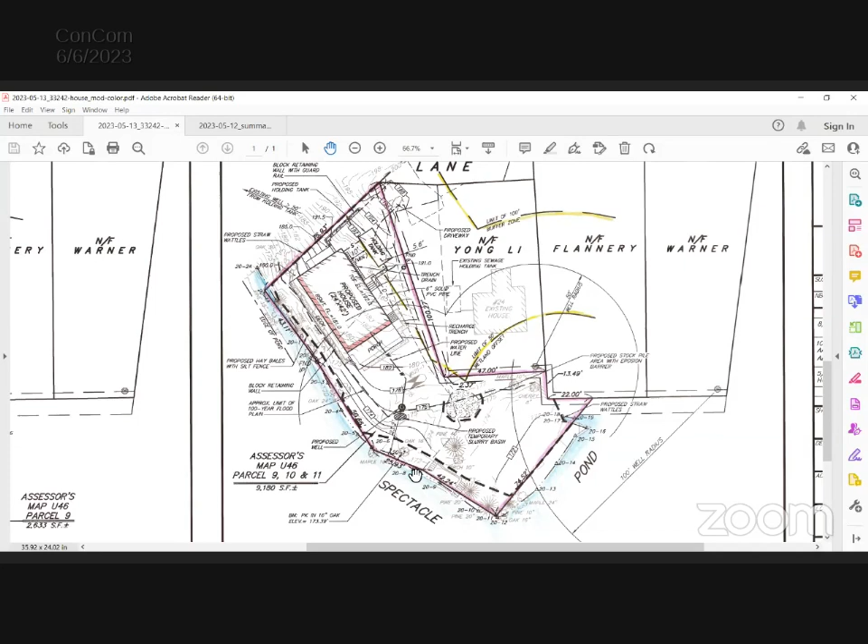Sarah, I would tend to agree with that. I mean, it's right on the water essentially, and expanding the square footage, I just don't see it as a viable way forward. Okay, thank you, Andrew. Anyone else like to voice their last opinion so we can move on?

Okay, all right, so we'll leave it at that. I think you've had some good dialogue tonight. Hopefully we've sent you in the direction that is best for you. Yes, thank you, appreciate the feedback. Okay, thank you, best of luck. Yep, have a good night.

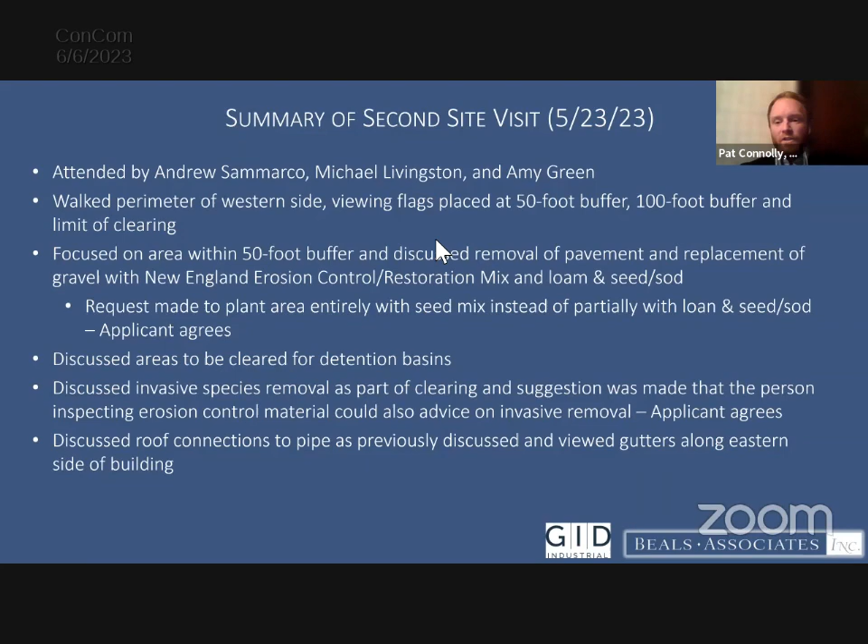And then lastly, we briefly talked about the roof connections and how the northern side of the building connects, we think, to the pipe which we talked about in the previous hearing. And also we pointed out that on the railroad side of the building, the eastern side, water is just collected in residential-style downspouts and gutters and infiltrated directly into the ground along that building. So it's a short site walk.

And then again, from our first presentation, the performance standards in the local bylaw for work within the buffer zone: we consider all the existing conditions and we minimize changes and disturbances to the extent that we can. We're remaining essentially within the limits of the existing disturbed and impervious areas, which is mostly gravel and considered impervious by Mass DEP.

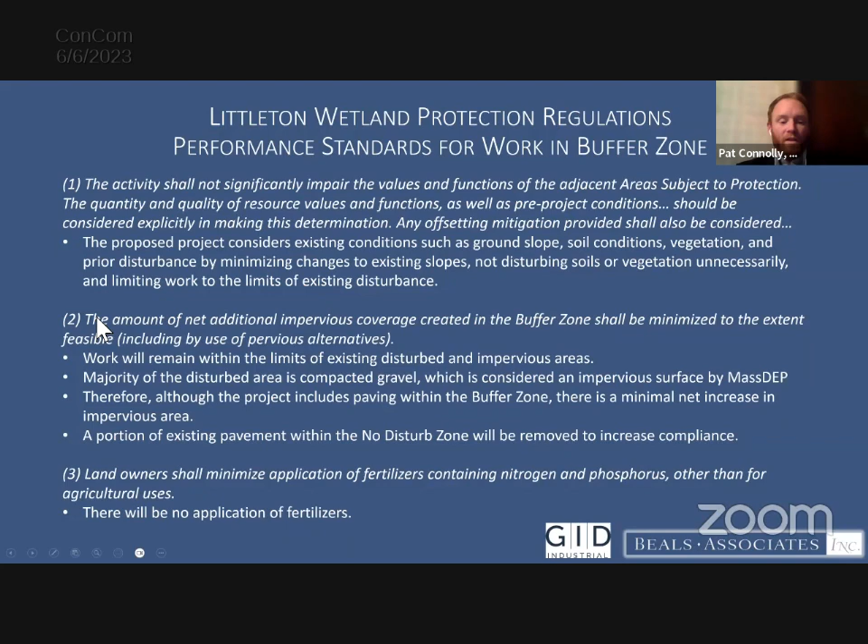We've heard on a couple of projects to that point, and so therefore, even with the proposed changes, overall there's a minimal net increase in the impervious area. And then there's the work inside the no-disturb zone that I talked about. The last point: there's no applications of fertilizers proposed as part of this project.

So just to recap where we are: we submitted this NOI in February, we've had 4 public hearings, we've had 2 site walks. We did revise the design a couple different times in response to comments and questions from commissioners, comments and questions from Green International, who's the peer reviewer, and then also based on on-the-ground conditions, mainly when we dug the test pits and found higher than expected groundwater.

The current design still protects the 8 interests of the Wetlands Protection Act and conforms with the local wetland protection regulation performance standards. Overall, the project does improve existing conditions in its original design and now in its current design. So I'll wrap up there and I'm happy to answer any questions the commission may have.

Thank you for doing that, Pat. That was helpful. I'm just going back to our original notes from the last hearing, where Green International had suggested test pits be performed, so that no roof leaders are discharging into the existing basins. Are those the test pits you were referring to? Yes. Okay, awesome, thank you.

I did have a chance to go out after you all went out, and I just had a couple comments on where your pink flags were, which is your edge of work. I noticed that beyond that, in places we have a lot of debris, and I'd like to make sure we're removing some of that debris, making it a little bit more habitat friendly. And if there are areas that have to be filled, that we're not putting in more of those stones and rocks.

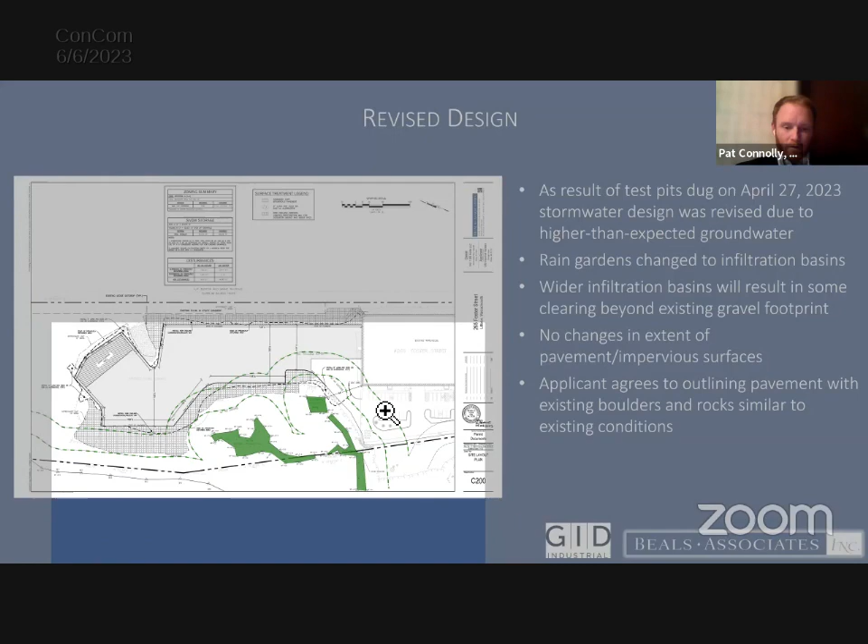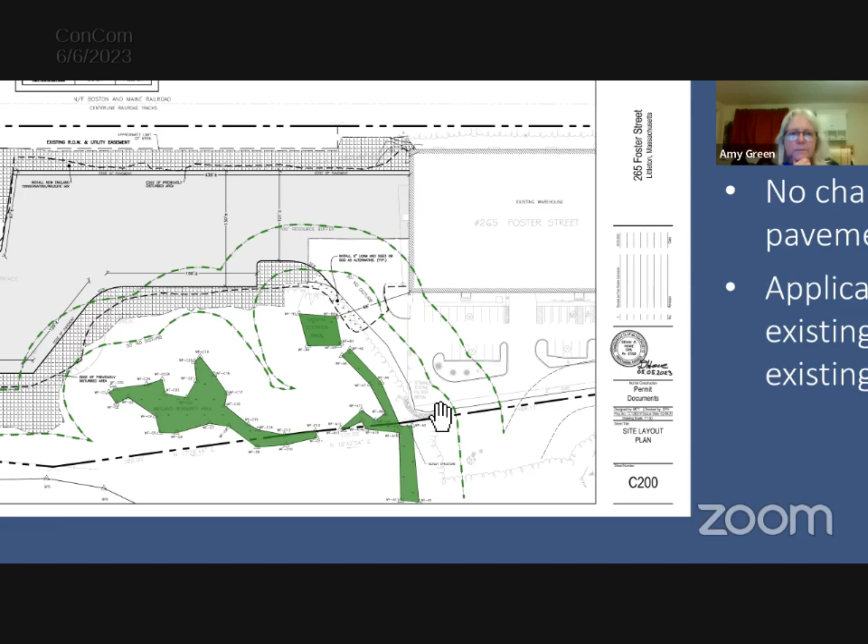That's a good question, Pat, could you address that? So I believe, Amy, did you happen to share with Pat that picture from the other day? Yes. Okay, so I believe you're talking about this area here where there's the stone check dam? Okay, so let me go to...

Amy, you're not able to share that photo, are you? I don't think so. Yeah, okay, never mind. So I guess the short answer is we're not proposing any work there. I don't think we're aware of that issue. So we can look into it. You got the photo that I saw though, right? Yes. Okay, and that was not even with a big storm.

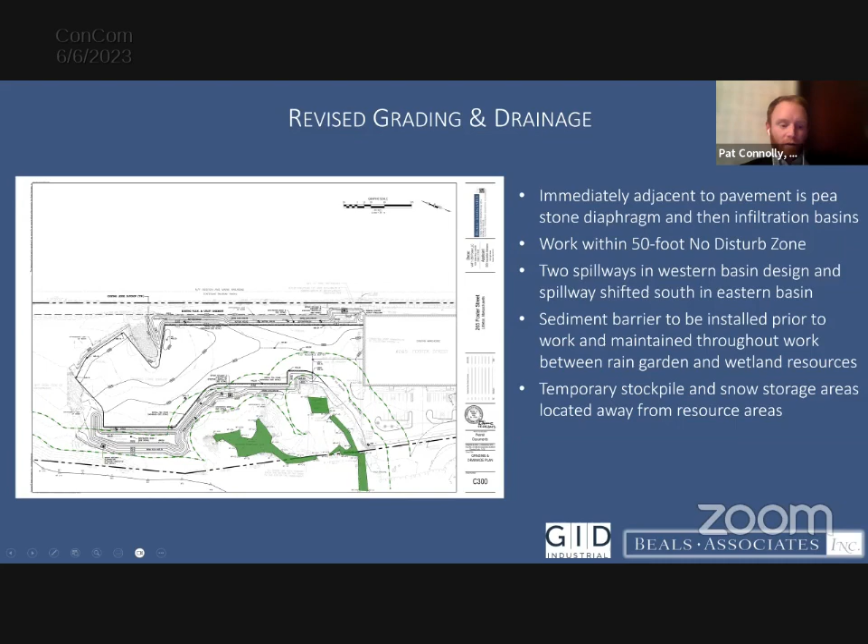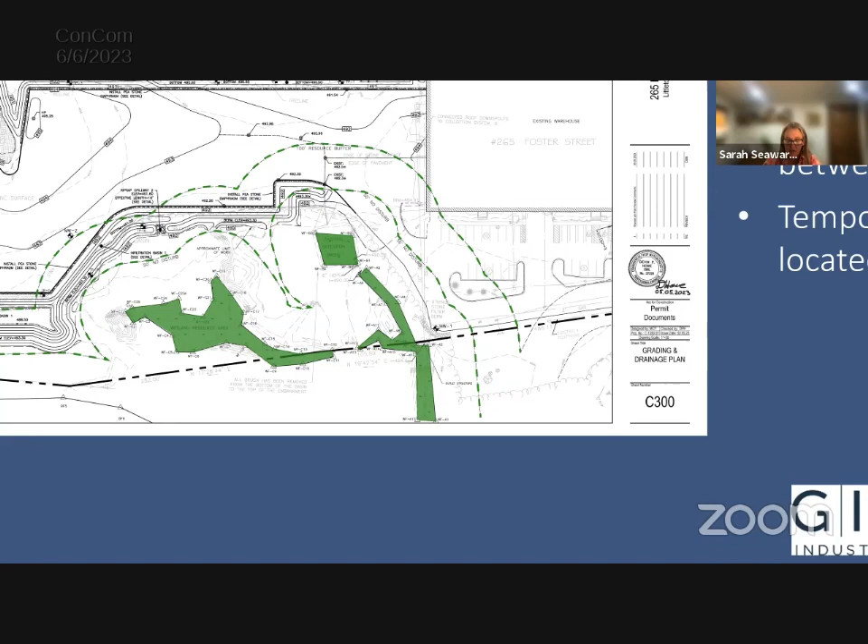So I guess the photo I saw was of the pipe, the outfall. And I sent you a separate one—let's see if I can get to it here. No, just prior to the photo that was taken on what would have been an inlet, but there is no inlet. How am I going to do this? It was a picture looking into that U-shaped area. Yeah, looking in, you'll see the crowned area, which is the barrier, and all the water that's backed up there. Because originally, prior to putting all those rocks in, the water was just sheeting right over. I don't know, let me see if I have this photo—bear with me.

Here, I'll show you what I have. So I have, yeah, the one prior to that. I have that one, I have this one, and I have the tires. So yeah, it was a separate—it would have been an email prior to that. I just have this other one, but it came through as a text message to my phone. So hang on a second, I think I can get it. Okay, if I can grab the screen. Is that showing? Oh, okay. Yeah, I haven't seen this before.

So Andrew, that's the area that used to just sheet flow right down. Yes, because the outfall pipe is actually below this, so this was undermining the pipe. So Pat, this was undermining the pipe that you actually have that other photo of. Yep, and so we put this in just as a stopgap. But this water's coming, as you're looking at the loading dock, right from the loading dock and coming right down through. So I thought that type of drainage and stormwater was going to be addressed, and I was surprised to see that much water there after not a large rain.

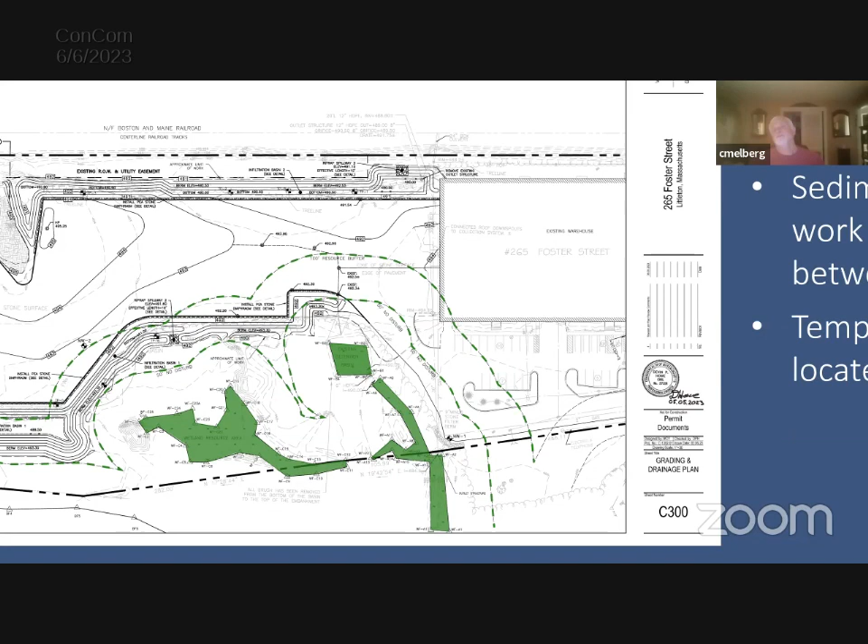Hey, one other question. Maybe it was addressed. We had asked the applicant to tell us where that water was coming from next to the railroad tracks that was going onto the site in high volume. I didn't hear a response to that. Did I miss it? Pat, did you address that in the last meeting? Yes, we had a couple slides that we presented. Where's it coming from, where's it going? So water is coming out of the outfall. I'll just go to the old slides.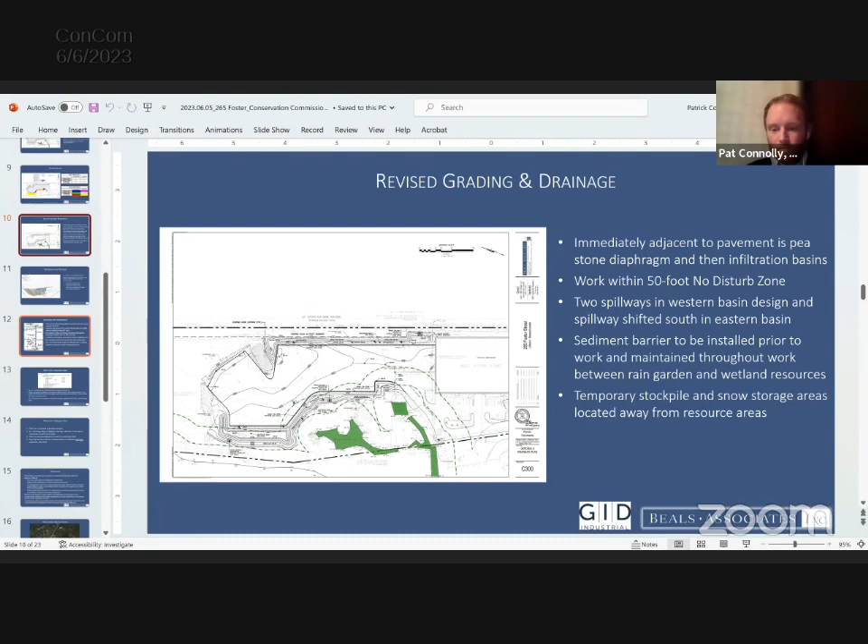So we tried to do a couple flow tests at 2 different times. Water wasn't flowing enough for the dye to make its way down the pipe. Water was coming out of the culvert into the catch basin, goes down the pipe. As part of our work in response to Green International, we determined some of the roof drains are connected to a manhole shown as this blue dot here, and then it comes out and outfalls onto Mass DOT land. There was no connection to the existing settling basin and the pipe. There's no connection to proposed work in the pipe. So it is simply a pipe that is separate from the work. It's not being removed, it's not being filled, it's not being dredged, or it's not being altered, which is language taken from the Wetlands Protection Act. And any connection here is also not being changed. The work is all separate from this.

We also presented how the pipe is not considered an area subject to protection based on anything outlined in the Wetlands Protection Act. We consulted the wetlands scientist who did the delineation, Dave Burke. He said maybe the closest comparison is that it's an intermittent stream, but that's not considered a resource area itself, and the portion that flows through the pipe is not necessarily protected as such. And if you wanted to look at the pipe as a wetland, it only has one of the three characteristics, which is hydrology. It doesn't have the vegetation or the soils. So we kind of covered this topic at the last hearing.

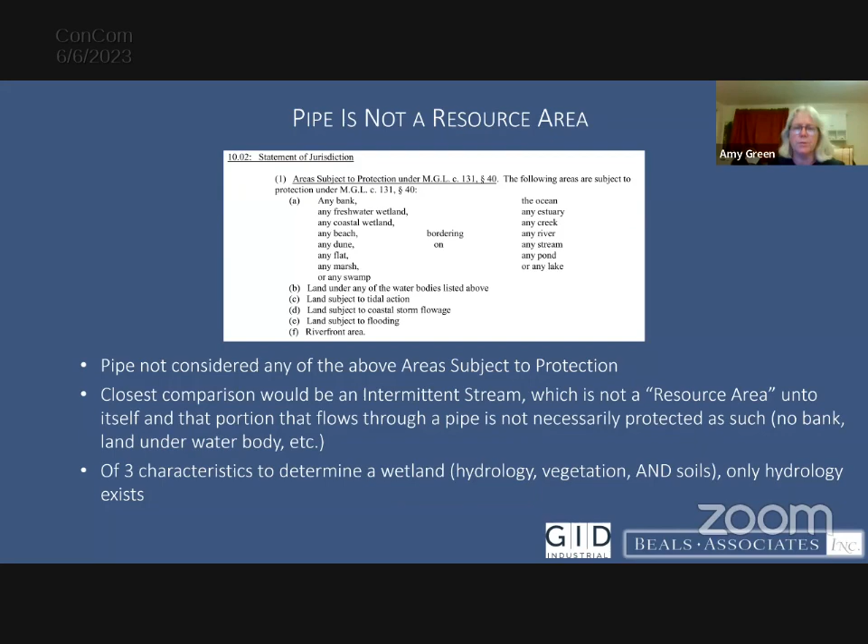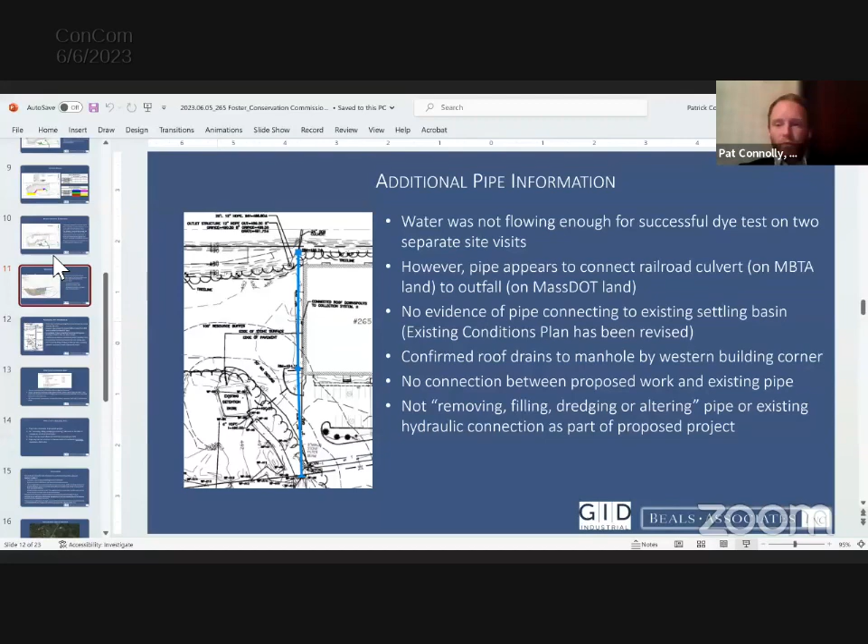I think the only other condition that came up, and I was trying to see on the plans but I forget, were there boulders proposed? Were they shown on the plan? I forget what came of that. They got moved, right? Yeah, we were proposing to reuse the rocks and large rocks and boulders that are on the site already. Can you come up with a diameter on that? Because there are piles of, I'll call it debris, mixed rock, which is past the pink flags. That's not what I consider marking space. You have one line as you drive in on the right, which is very defined with your large rocks that are substantial. That's what I'm looking for. I don't know that you have those on the site unless you pluck them out of the ground.

Yeah, I don't think that would be a condition, just to let you know. Okay, I don't think we have a specific diameter in mind, it was just that we try to use the largest rocks on the site as a boundary, as exists today. You have an established boundary already, so I would use those diameters and carry forth. Okay, it's in the back of the property. So are you talking at least a 2-foot diameter? Oh, they're bigger than that.

The ones that are there. Call it a 4-foot diameter then? Sure. Okay. And then another condition would be in terms of the invasives.

And also for removing some of that fill and debris, such as the tires, Pat. So I was going to suggest that be a condition—when I go out to inspect the erosion controls, we can discuss invasive species removal as well as debris they can reach without getting equipment through there.

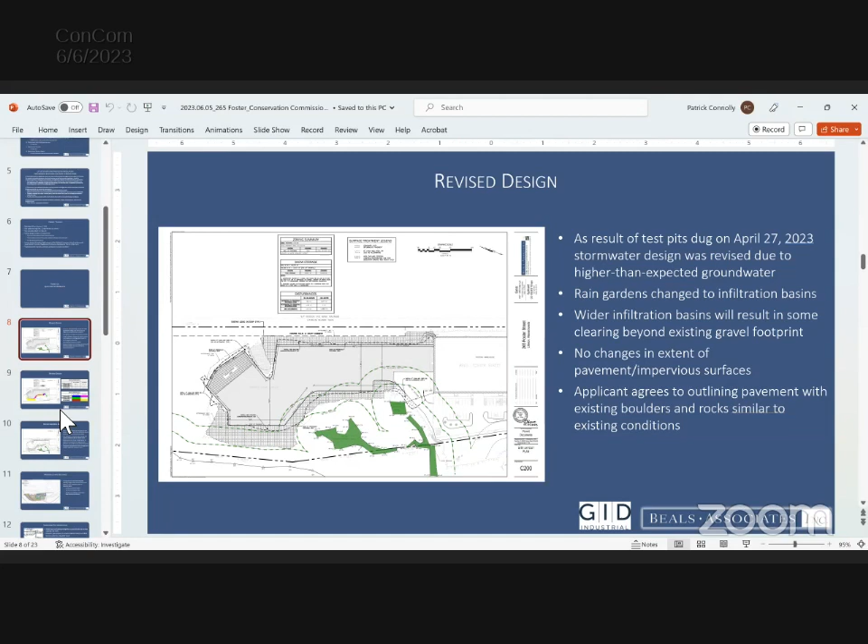That'd be great, because there were a couple that looked like they could potentially be saved. I understand most of them probably can't be, but if doable. How about I do that check?

If this works for GID, have you stake out where the erosion controls are going to be, then we can look at some trees that may or may not be saved from that line, and also look at the invasive species and the rest of it at that site walk. Okay, that makes sense. Okay. Yeah.

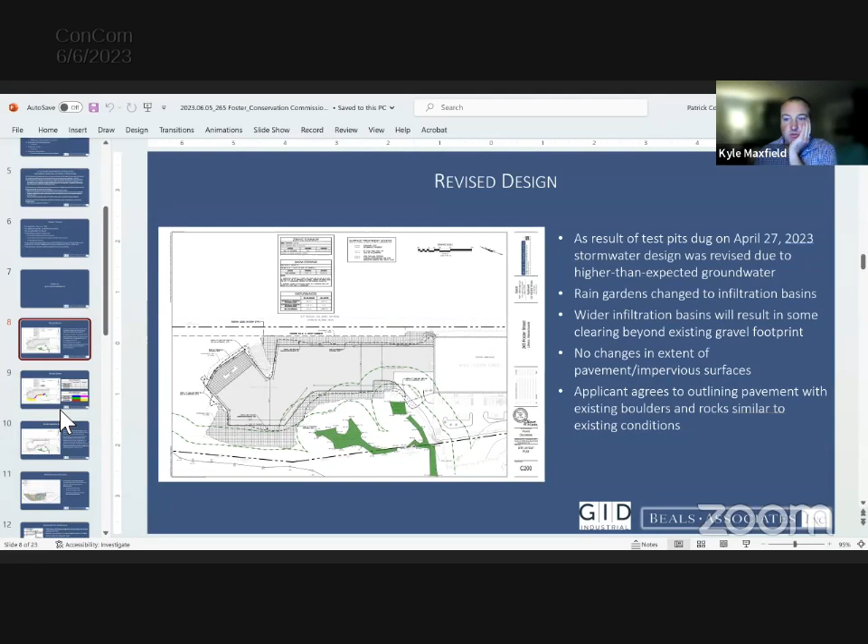Anyone else have any other questions? Comments? Okay, would a commissioner like to make a motion? Sure, I make a motion that we close the public hearing and issue order conditions for 265 Foster Street, R11 1-0, 1-2, and 1-3, MAD, Mass DEP file number 2040980, with the conditions as listed.

Second. Can I just double check—does one of those conditions include coming back with a fix of that drainage area? Or is that just going to be a separate piece? What are your thoughts on that?

I'd like to have it addressed. I don't know if the term 'field change' applies in this scenario, but is that something we can work out in the field? I think once you have a better understanding of the flow, we'll know if it can be a simple change or not. But Sarah, why don't we condition it that GID is obligated to address that area?

Yeah, sure. Yeah, investigate, and yep, okay. All right, roll call vote.

Brian—I'm sorry, who seconded it? I did, thank you. Sarah? Sarah Seward, aye. Kyle? Kyle Maxfield, aye. Michael? Michael Livingston, aye. Chase? Chase Gervais, aye. Carl? I'm Malberg, aye. Myself, aye. It is unanimous. Okay, I don't think I actually finished my vote, but I was an aye too.